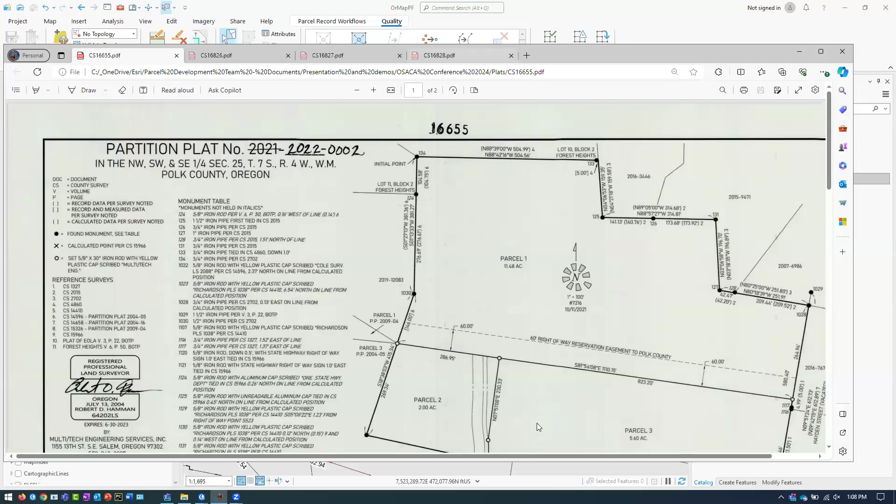All right, so I've provided this data. Christy here, and you provided the data. And this is actually data from Polk County, right, a small subset of data. I was also provided some plat maps that show that this parcel, this big parcel here, according to this plat map 2022-0002, is being subdivided into 3 separate parcels.

Now it's hidden. And each one of these, like this section here, parcel 3, is then subdivided into these 2 parcels, and then this parcel up at the top is being subdivided into these 2, and the parcel on the bottom left is also being subdivided as well. So we're going to go through the actual record-driven workflow of bringing in this parcel, subdividing it, and doing record-driven workflows for each one of these different transactions. I'm going to explain what's going on even behind the scenes, like what the software is doing to the existing parcels and what's happening with lines and polygons.

So to start things off, since this is a record-driven workflow, we're going to start by creating a new record. In ArcGIS Pro with the parcel fabric in map, we have this thing on the top left called the parcel heads-up display, or parcels HUD. This is where you can create new records, manage existing records, and there's a bunch of other tools on here as well. All these tools can also be found on the parcel record workflows ribbon, where you can create a new record up there as well, but I like to use this because it's really handy—it doesn't matter what tab I'm on the ribbon. So I'm going to go ahead and click that, and say create record.

This is going to be the legal record, meaning that everything I create or modify will be associated to this record. So any new parcels I create, any new lines I create, they're going to be associated to this record. If I retire existing parcels, those parcels will then be retired by this record. So in this case, I'm going to name this record. I don't know if this is how you guys name your records, but I'm just going to call this—I see that they call them like partition plats—2022-0002.

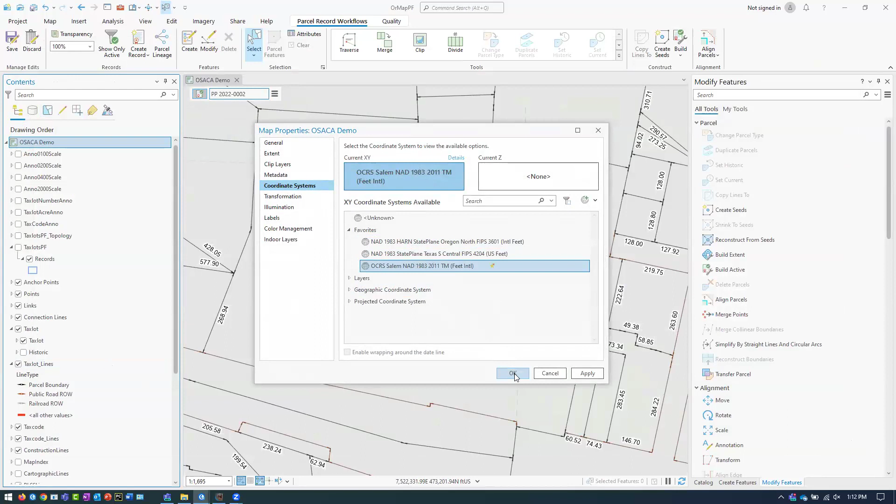So now I'm going to be projecting the data in the Salem NAD 1983 projection. I'll click OK, and now the data is being projected in what the basis of bearing is being utilized in the plat map.

Now I want to bring in, I want to traverse this boundary of this parcel to bring this parcel into this area. So I'm going to go and click on the traverse tool, and I want to set a start point.

I'm going to be creating tax lot lines, and where I'm going to be starting, according to the plat, this is the initial point here on the top left. That's where I'm going to be starting.

Now, also in the interest of time, I'm not going to sit here and COGO this entire parcel in, because we're going to show COGO in here in a minute as well. I actually have a traverse file, which I can import, that provides all the COGO information for that.

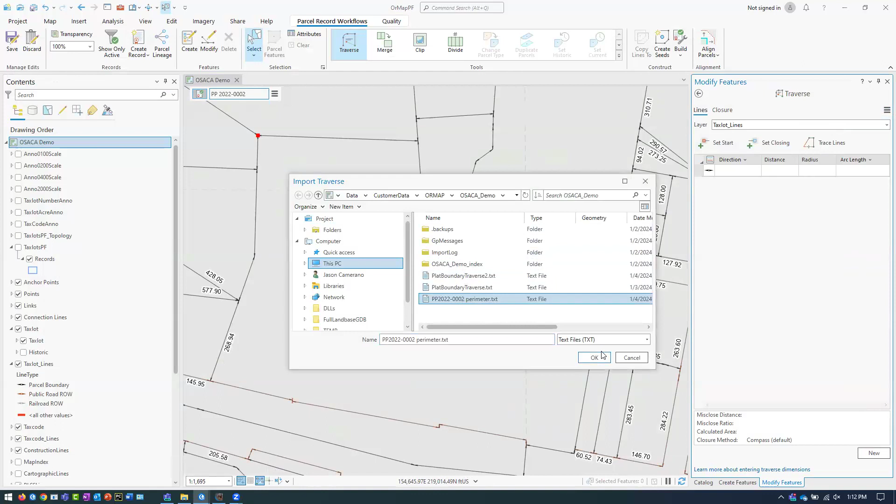So you can see as I brought it in, the lines have all been created. I can see here in the grid that all the lines—I could QA this with the actual plat map to make sure everything matches up. This closed distance of 0.02 feet, so this is a very highly accurate traverse. It closes well, and at this point I'm ready to just bring this in.

But first, actually, the other thing about this plat is what I want to do—I actually want to split this here too, because while I'm in this projection I'm currently in, I need to also subdivide this parcel into these smaller subsections.

So what I'm going to do is go up here to the parcel record workflows ribbon, and click show only active. What this is going to do is filter out all the other layers and only show lines or features, polygons or lines, that are associated to my active record. So in this case, all these lines I created are associated to my active record—that's all I'm seeing. This is just putting a quick def query on all of my layers.

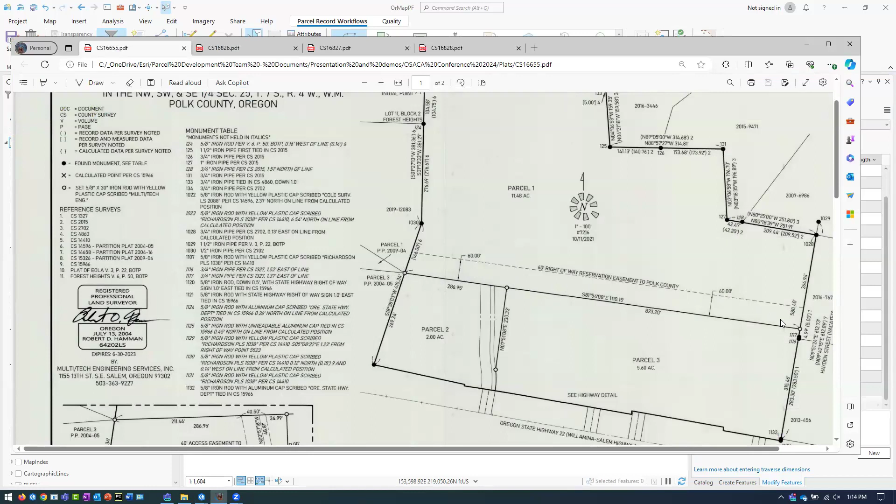So what I want to do is start a new traverse and split this parcel based on this plat. Over here on this point is where I'm going to start, and I'm going to draw a line from this point to here, and another line from this point to here. This point, if it's created over here, I believe it's right there, 264, yep.

All right, I'm going to click new traverse, and set my start point to this location where it was split. I want to set my closing location, because in this case I'm not creating a full loop traverse - I'm starting at a point and ending at a point. So I'm going to set my closing location to this location on the right. Now I'm going to start entering my traverse.

The first line, actually I have the plats here, so I have to keep flipping back and forth. All right, so the first line is going to be going at 81 degrees, 54 minutes, and 8 seconds to the southeast. Now, since this is using quadrant bearing, I can simply put 2 to represent southeast - 1 is northeast, 2 is southeast, 3 is southwest, 4 is northwest - and hit enter.

Now it's asking for my distance value. I'm going to go 286.95 and hit enter. I'll accept the bearing again, because it's the same bearing for the next course, and enter this distance of... oops, nope, that's the full length of the line. It would be 823.20 feet.

And there we go. We can see that the line now closes on that close point. When that line was created, the end of that line fell within a 1 foot tolerance of that closing point. Therefore, that line is now snapped to that closing point, and a misclose error basically has been applied to those features. This allows for the geometries to change basically to fit and connect to those points, like the starting point and the end point of the traverse.

58.89. I'm going to hit enter. Now I notice my curve is actually going in the wrong direction. If I switch back to the plat, you'll see it's going counterclockwise, not clockwise. That's just a mistake here.

I can just change the direction of the radius to minus 211 feet, and that's going to change the direction of the curve. Now you can see it's going in a counterclockwise direction.

Now that I've fixed that, I can enter in my last line feature here at 7 degrees, 51 minutes, 8 seconds to the northeast, and this is going to be 230.33 feet.

Once again, we've closed within 0.01 feet of the closing point, so we can see that the measurements are highly accurate, and I can accept these results.

So there we go, we've got our 3 parcels. We've traversed them in. Now, actually, we've just traversed the lines, we don't have our parcels yet. So our next step is to actually create the parcels that fill in these completed loops of lines.

The next step in the parcel fabric record workflow is to create seeds. This is going to create parcel seeds within each of these closed loops. These parcel seeds are technically actual parcel polygons, they're just in the small seed shape right now. We call them seeds just because they look like little dots.

At this point, we can build the parcels, which will allow those seeds to then grow out to the area of that closed loop. And now we have our parcels.

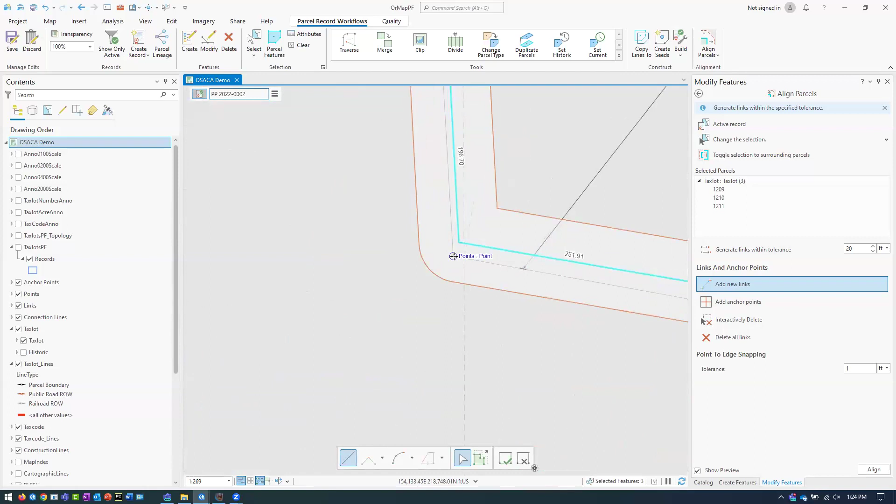I'm going to create links between the geometry I created and the existing geometry below. Now, I could click generate links, but since this data is pretty far off, with a buffer of like 20 feet, I don't always trust generating links with that big of a distance. So I'd rather go in and manually create these links, because sometimes it has trouble figuring out which vertex or turning point is associated to which turning point when automatically generating links.

If this was a lot closer, I'd be more comfortable clicking generate links and then investigating each one. So here's an example: at this point, it's going to be associated here, and this one is going to be associated with this location. Does direction matter?

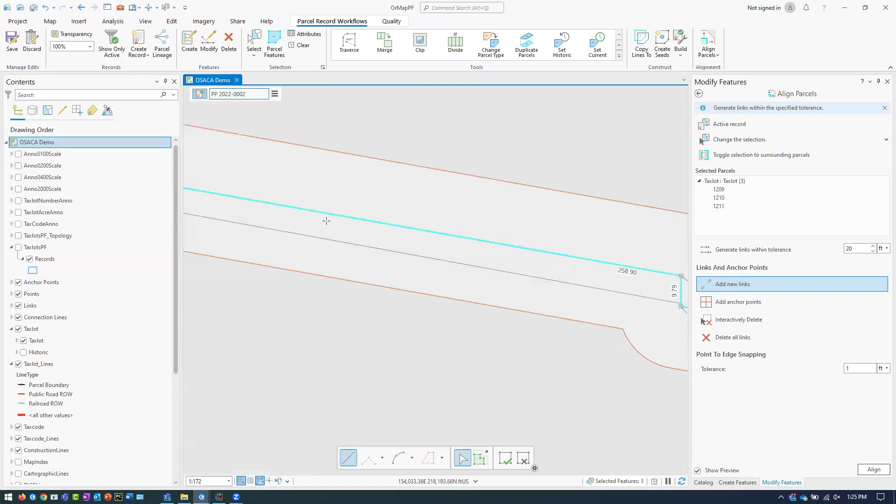On this, no. I'll explain how the alignment actually happens. Whatever is selected is what's going to move. In this case, my incoming geometry, the one I created, is currently selected, and I don't want that to move. So I'm going to push a button in a moment that changes the selection.

Let's go over here to this corner and click there. I noticed when I did this the first time, this was another one that definitely needed a link. So I think those... oh, no, there's one more link here.

So two things: with aligning parcels, the selection is what moves. In this case, I want everything else selected, so I'm going to click this button, toggle selection to surrounding parcels. Just like that, all the parcels surrounding my incoming geometry are now selected, so those are the parcels that are going to move.

The other thing I need to do is change my point to edge snapping tolerance from 1 foot to 2 feet, because I noticed when I aligned this the first time, the existing geometry here is a straight line, but my new geometry has curves. So when it aligned and everything snapped together, there was more of a 1 foot distance between those curves and that straight line, so it didn't seam it up properly. But changing this to 2 feet, it was within tolerance, and it seamed it up pretty nicely.

So with that, I'm going to go ahead and click align. It'll do the processing. And as for the question about whether the direction of the links matters—they do not, because it's based on the selection of the features, which determines the direction things are going to move. So there we go, we can investigate some of these corners and see that everything has now aligned.

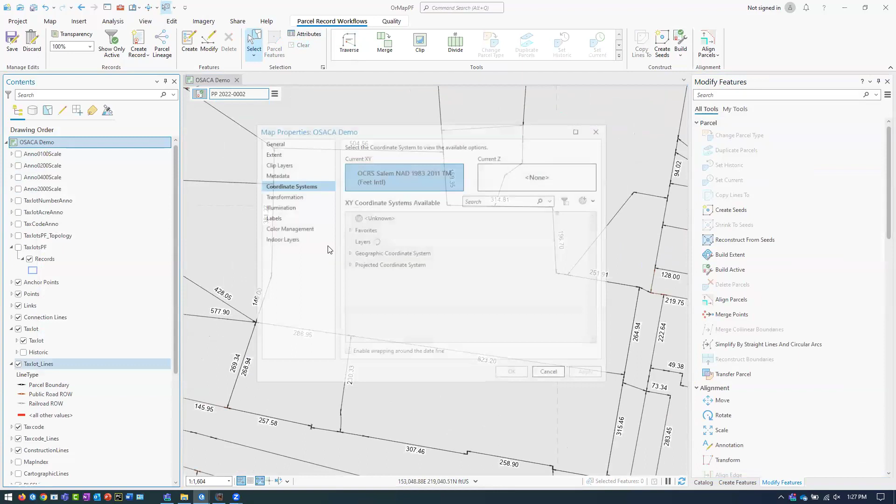All right, so I'm going to back out of the alignment, and show you what it looked like if I imported that traverse without the proper map projection. I'm going to go back to the map and switch back to the State Plane Oregon projection. I'll click OK, go back to traverse, set my start location to that point up here, and import the ArcMap traverse, choosing the same one.

And you can see it's quite a bit off, much more. I've already adjusted the data a little bit to fit, which was already slightly off, but this would have been even more off. So the movement I already did, plus this, is how much this would have moved.

It was pretty significant. When I first saw it, I was like, there has to be a basis of bearing something on this document. That's when I went and started searching for it, because some of those areas were like 10, 12 feet off. It was pretty significant.

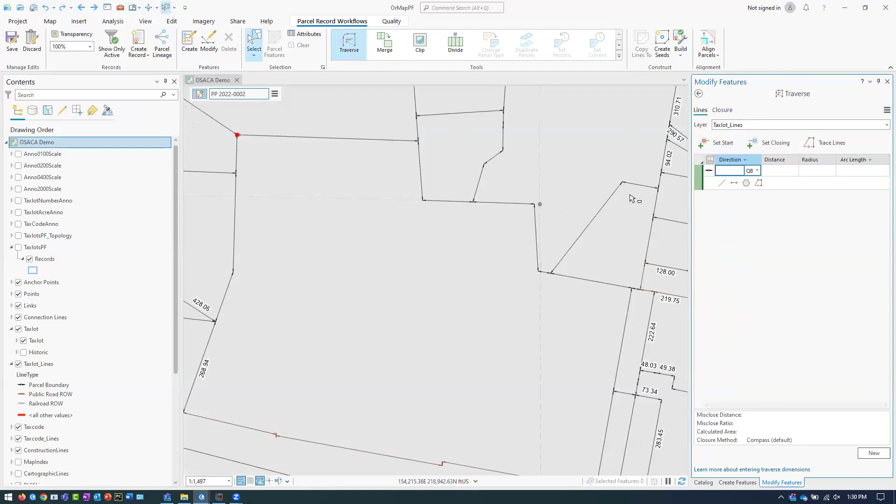As far as using the aligned parcel tool, there's some people that like it and some that don't. I know too, the way that we illustrate is we really haven't done anything with conversion or with the coordinate system, but instead we do ground to grid. And we match the line up first, and that way the first line typically aligns with everything else. That's kind of what you're talking about with rotating. You may rotate it, set the basis bearing up, or you may rotate when you're done.

So adjusting the outside in when you know your map's not as great, or doing it the other way, is this something... it's too bad Donna's not here, who retired last year, because she would be going, does this look okay? Well, I might have a concern, like, so you want the road to remain, and as I see it, the road's gonna adjust itself to align with the new import.

But you might really trust that road, and you want that road to stay the same. I just see a slight issue of everything around being adjusted to fit this new import. So what do you do in that particular case? And again, you keep going, get your thing in - I can talk while doing this too.

So what you do in that particular case, I would recommend - things are going to, especially if you start having survey grade control networks in your data, those are going to be the real true representations of where things are supposed to be and what things are supposed to be tied to. So yeah, if the road moves slightly, if you run things like least squares adjustments, the things will adjust to where they should properly be based on the control points and the COGO measurements that have been inputted onto the lines.

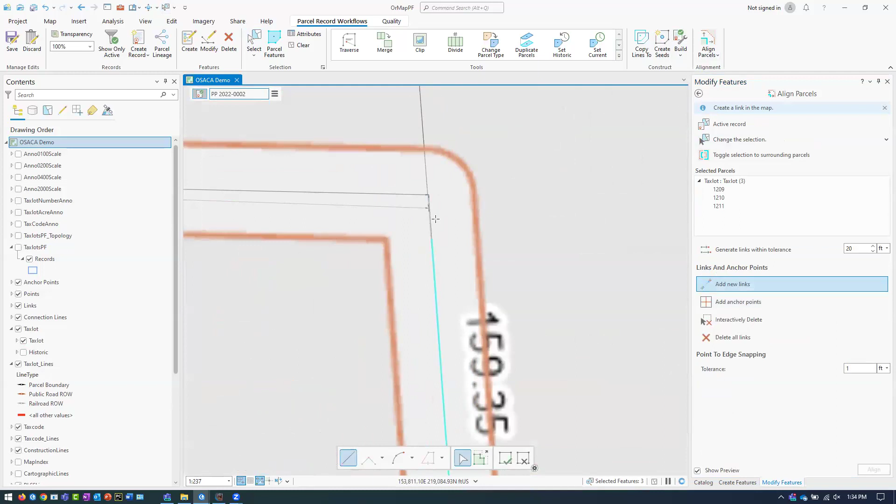So as you're adding those links, can I temporarily add control points? Let's say I like my road -- it's not the greatest road, but for this I want it to hold. Can I add those control points, say they're fixed, do the adjustment when I'm done, and then delete my points?

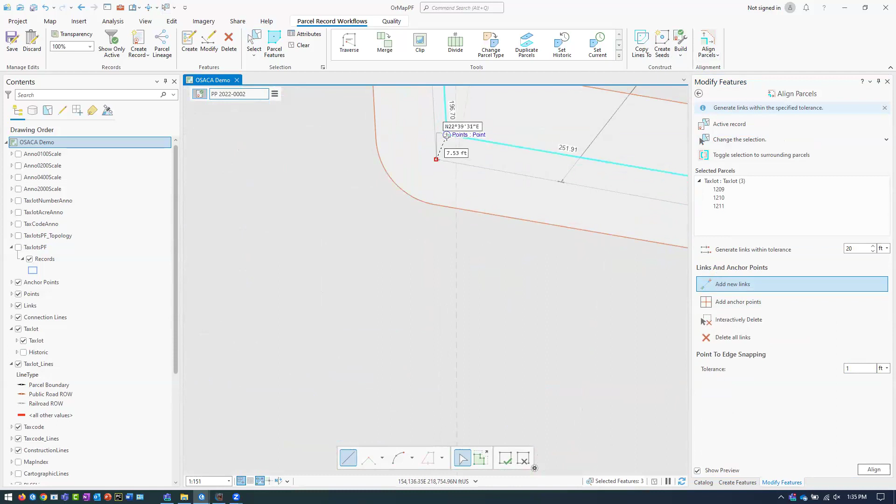So like roads outside of this adjustment, but your south line there -- along the south line, could I add some and effectively hold it? You could, but if you added those beforehand, those won't move. So you could put control points down there. Okay.

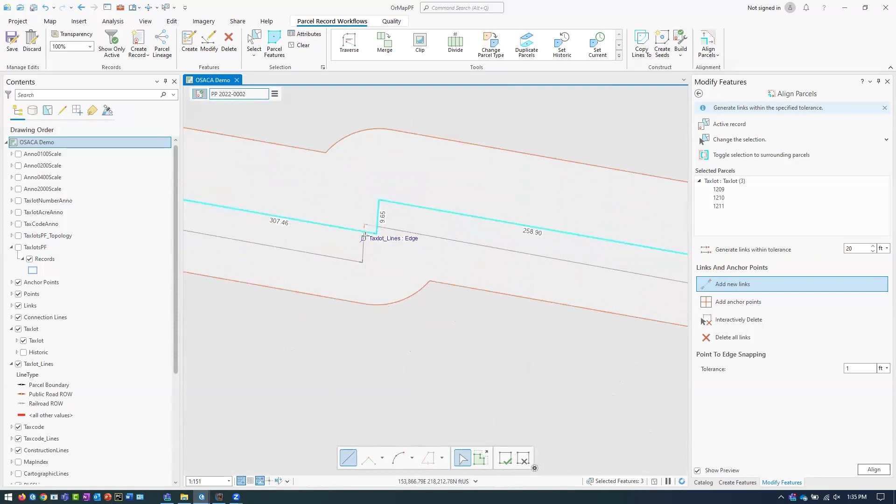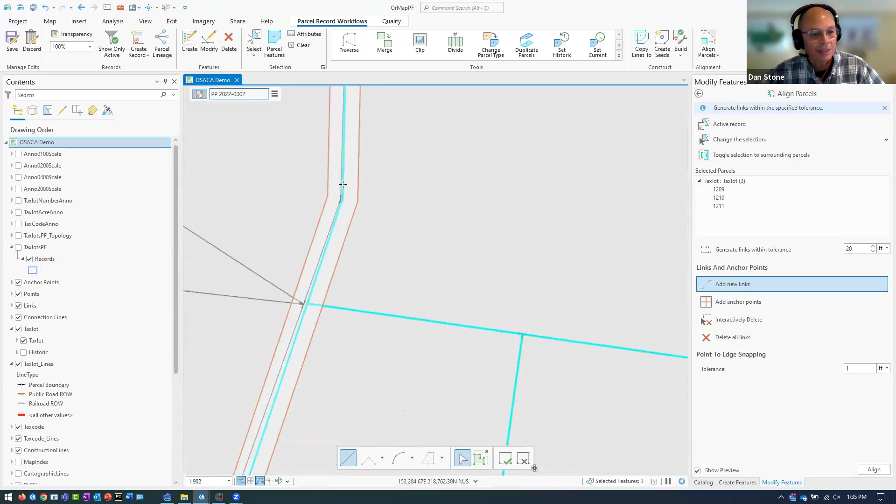Dan. Yes, I'm here, Jason. There you are, been watching. Dan, I thought you may have stepped away. When I was introducing myself I called on you to also introduce yourself, but you can go ahead and do that right now. I think a lot of the folks know me. I'll turn on my camera if you guys can see me. Dan Stone -- I was out there probably right around 2019, 2020 in Bend. I met some of you guys. Some of you couldn't make it over the mountain, but sorry I couldn't be there today in person. But Jason, I'm glad you got to go up there.

So the next one I'm going to do is plat 2023-0015, which is not that one, this one here. This is another partition plat, and it's going to be partitioning parcel 3 on the bottom right. It's going to create a small parcel here, and then a split line from the top to the bottom here. So for this one, let me just get the map out here that I have.

So you're processing all this sort of as a multi-packet record. You've not committed this, you've not saved this, and so the underlying retired by record is there, whatever. You're just processing all of these in one sequence.

I am processing them all in one sequence. That is one way to do it. I'm actually going to process it in different sequences right now because I'm going to be creating a new record for each one. So in theory, this parcel that existed here to begin with, we can see we still have that full parcel, and then we have the small partition one. This full parcel, if it's ready to be retired now, meaning that these new parcels are the new current ones...

With this current record active, which is PP 2022-0002, I can simply click set historic. And now it has retired that parcel.

So I can go down, I can find the tax lines, and there's a layer here called historic, and you can see that parcel has now been retired. So if I click here with the history turned off, you see I only have one feature. There's no more selection chip allowing me to toggle between. So at this point, we can say we've retired that existing parcel, and these are the new legal parcels.

And then that was done according to this one back in 2022. Now these new ones, let's say a year down the line, these need to be partitioned again. So we're going to go to this parcel here. This is a new record.

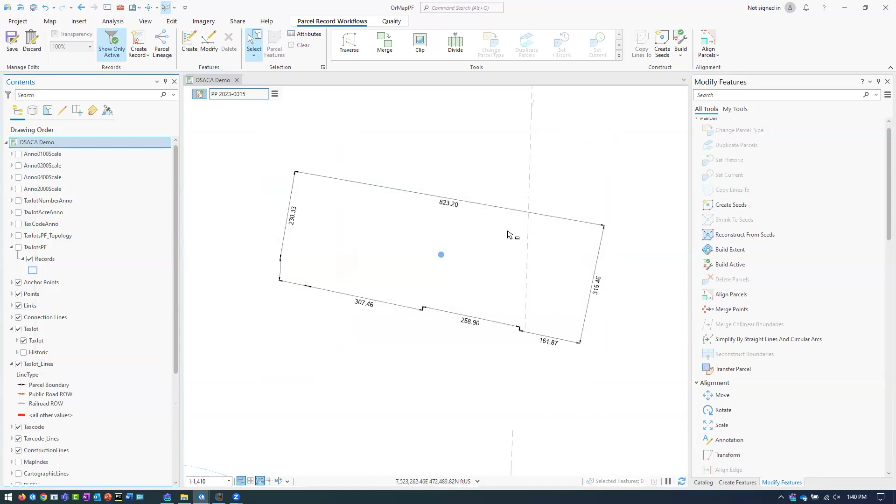Now, I'm back in — if you recall, I switched my map projection back to State Plane, Oregon. So now I want to actually set the basis of bearing manually, so all my lines will then take that into account. So what I want to do is go to the edit tab, not the quality tab, and choose ground to grid.

And I want to choose enter the ground line and then draw the grid line. So my ground line is actually still set from the last time I used it — it's this line here at the top. So the measurement information, the direction of that line is 815408 to the southeast at 823.2 feet. So this is my ground direction and distance.

Next, I'm going to click next, and now it's going to want me to enter the grid line. So I'm just going to use that same line, click here, and then click the endpoint. Now you can see if I go down here, my ground to grid corrections have been applied. So this is my offset and my distance factor. You can also see it up here as well.

So now when I'm entering lines, I don't have to change the projection of the map, but all the data I'm going to be entering, this ground to grid correction is going to be applied.

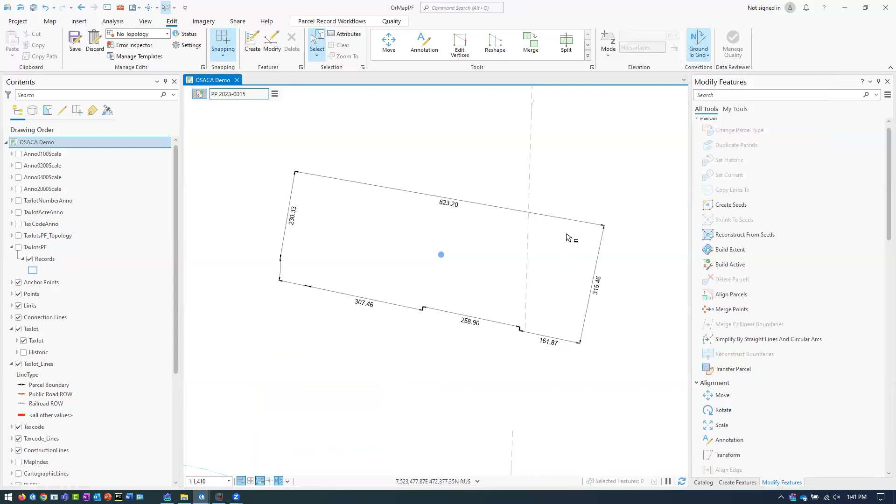So let's go ahead and flip back. I need to create this line here. To do so, I'm going to take this line on the top and divide it. So go back to the parcel record workflows tab, and I'm going to click divide.

I'm going to use the divide tool to divide this line from the end of the line. I want to go back 139.17 feet, and you can see based on the preview where the split is going to be. I'll click divide, so now we've created two lines.

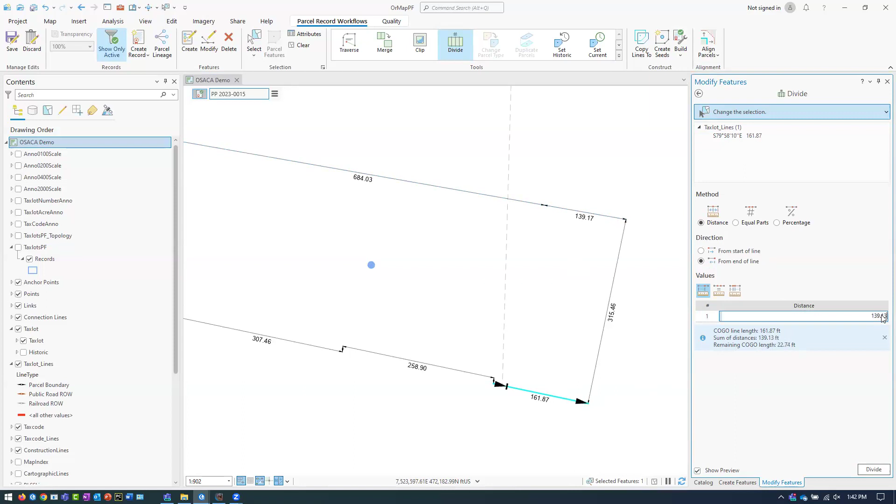I'm going to divide this line at the bottom in the same direction, from the end of the line, which is over here. I want to go back 139.13 feet, and I'll click divide there. So now we've divided the lines.

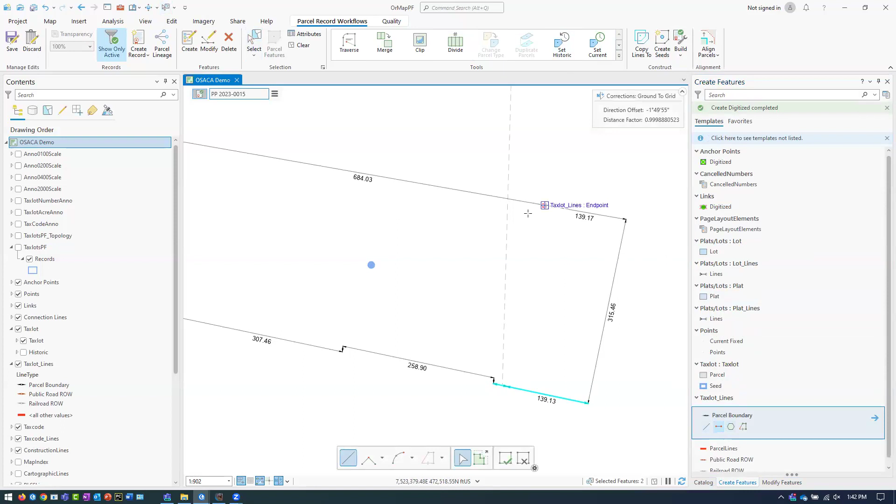I'm going to go back in and actually create the line like you stated, just clicking the line through. So I could go to create features, tax lot lines, this one here. I'm going to do a 2-point line, click this line on the top, and click at the bottom.

Then I'm going to go to attributes, and in here I can enter in that information. I can say this was 09-51-24 in the southwest, which is 3. So I put that there, and then it was a distance of 310.75. That's just another way I could have entered the line, as you explained earlier.

All right, so that parcel has now been split, and I want to do some more division on these lines. I want to divide this line. I'll click divide, and in this case I'm going from the start of the line, so from down here I want to go up 85.43 feet.

Divide it, and I'm going to divide this line from the end. I'll switch back to the end of the line, and go 147.75 feet. I'll hit enter there, and then click divide.

Now we're going to go back to the traverse so we can have that extra redundancy of knowing where the lines and features start and end, and whether there's a good misclose. So I'm going to start at this point and close at this point, and enter in these measurements. I'll show you some other tricks for entering traverses. Let me enter in this first one.

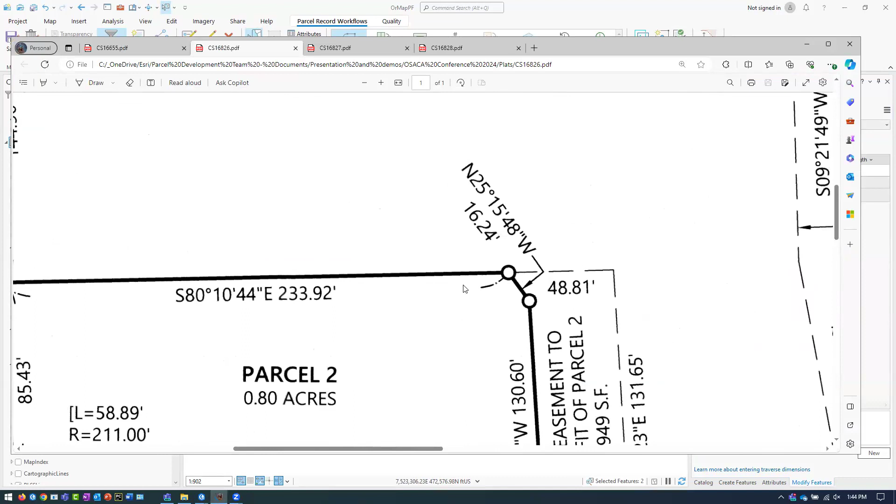It's going to the southeast at a distance of 233.92. I'm going to hit enter. For the next measurement, if we switch over to the plat and zoom in, we can see that this first one was southeast. This next one, the way I'm going clockwise, this direction says northwest. So if I'm just entering it in as I see it, the actual line is not going to go the way that I want it to go.

So I'm going to go 25-15-48, and this is going to the northwest. I'll hit enter on that, and say 16.24 feet. And we see that's going the wrong way—the geometry is going in the wrong way.

Instead of me going in and changing those around, there's a new command where you can select the line, right click, and say reverse direction. And you can see the line direction change. So what version is that?

3.1, 3.1 or 3.2, I actually don't know. It's a fairly recent one. We showed it off at the UC this year, and a lot of people liked it a lot. That'll reverse the direction exactly 180 degrees.

There's some other things you could do within the traverse, which is fun. I'll do it on this one. So this one is going to be 7 degrees, 29 minutes, 48 seconds southwest, so that's 3, and the distance is 130.60.

So you can kind of use this distance field as like a calculator. Let's say the measurements were labeled like 50, 50, and 30.6 feet—that's just how it was labeled. But you know it's one straight line segment, and it's supposed to be 130.60.

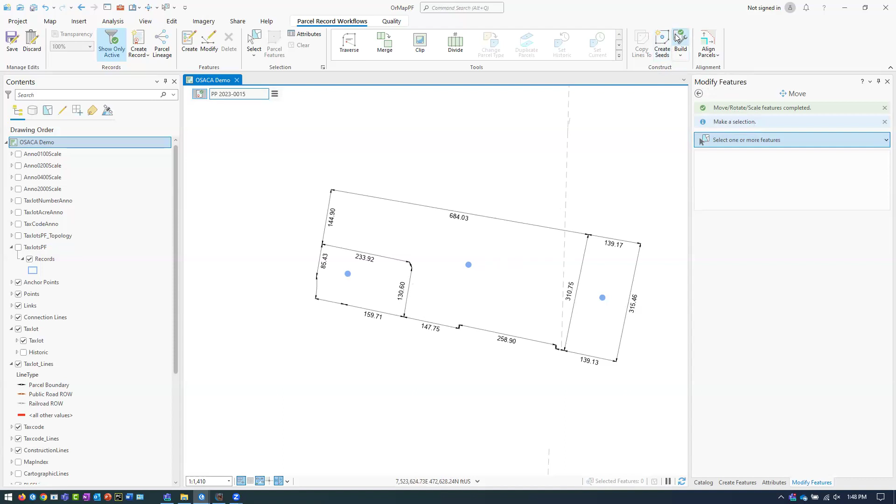Did you have to delete it, couldn't you move it? I could have moved it. Delete was easier because it was just a template seed that wasn't anything. I could have moved the seed, however I wanted to do that, and then I would just click build, and the same thing would happen.

The reverse line, what will it save as the Cogo activity? Will it save the original one you input or the reverse? In this case, it will save the reverse direction input because in the actual numerical value, it's going to be going in that direction. If I needed it to be in that other direction, I would have to go back in and change it, or I wouldn't have been able to do the traverse that way, because the traverse needs to have a full flow.

So if it was really required by the authority to say that line says northwest on it, I would have just actually finished it up, made sure everything's good, and then gone back and changed it.

So what's the difference between doing this, creating the seeds and building them, versus just using the line work to split the parcels? Like just doing a split straight across, selecting the lines and splitting, having the parcel as one parcel and splitting the lines into 3 parcels.

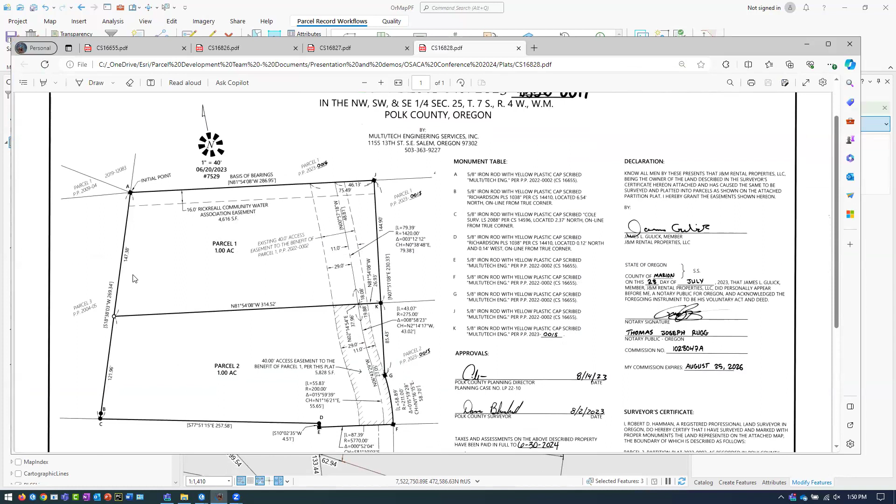I think there are different ways that I could do this. For this parcel here, I can just switch over to this one. I could technically divide this parcel, let's just see how well this works. I could take this parcel - oops, I got the move tool active - let's see how well this works.

We're going off script again.

So we're going to create a record for this one. I'm going to say this is - what is this one? 017. So 2023, 0017 partition plat. Forget to set the date there.

It's fine, so I'm going to click divide. I'm going to divide this parcel by - this is the dividing area - and I want to do equal area, equal width, number of parts: 1 part, and going according to this, it's supposed to be 144 feet, 44.9 feet down. I think that should be right.

Oops, not that one, that's the wrong map. Got it? Oh, thank you.

147 feet... 147.38. So that's about where it's going to go. I'm going to click divide. So that's another way I could have divided. So now I've divided the parcel.

However, doing the division this way, it is actually not splitting the line up on the left side here. This is an enhancement we're actually working on that will allow for that to happen. But the other thing is doing the division of the lines, you get that extra bit of accuracy of dividing the line and splitting the lines up into those two separate pieces. You're able to do the traverse to see the redundancy of how accurate the actual measurements are on the plat.

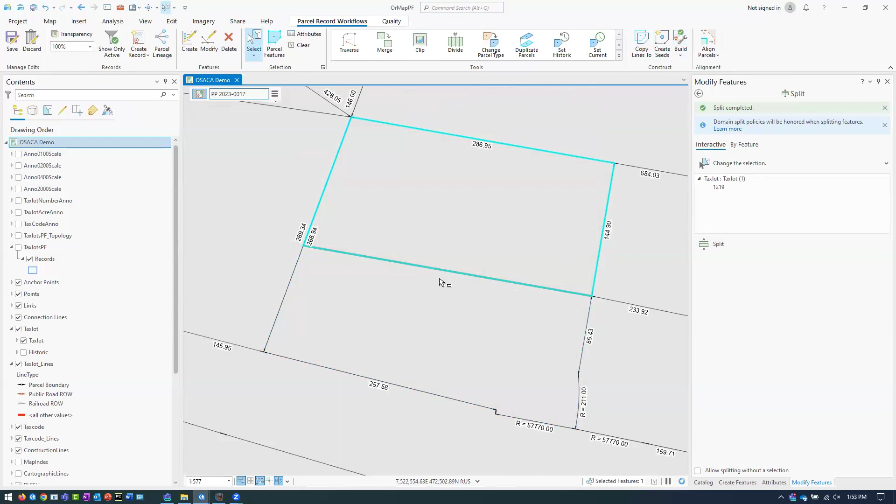There's no line created here yet because we split the parcel. So now what I need to do is I need to click build again to then create a line feature in here. Here my selection.

What do? We created a taxlot line. Oh, I created the wrong line feature that's missing. Line type just is not identified. Oh, line type's not identified. Yeah, that's what it is. Got it. So I could have just done attributes, and it's under line type, public. Something. There we go. There we go.

Now we're good. Then I can go in and attribute that line work as well. What was the question? So build creates the feature that's missing. If you add the lines, you hit build, it creates. Actually, it did create the line. When I did the split, it actually did create the line.

I thought it didn't. I thought I just split the polygon. But since I had an active record, the split tool became parcel aware too. So when I split the parcel, it then created the line on it. But it didn't know which line to create. So it just created a line from that feature class that is associated to that parcel.

And then I had to just apply the line template. So I didn't have a default value set, so it just made it in that one so that it still caught it. I thought for some reason it's a topology error. I was like, what is happening? We like it that way because it double checks us.

There you go, editing. As I say, the redundancy is always a good thing when entering in a lot of this data, like having this redundancy of checks within your data to flag certain errors or certain things that people may have forgotten.

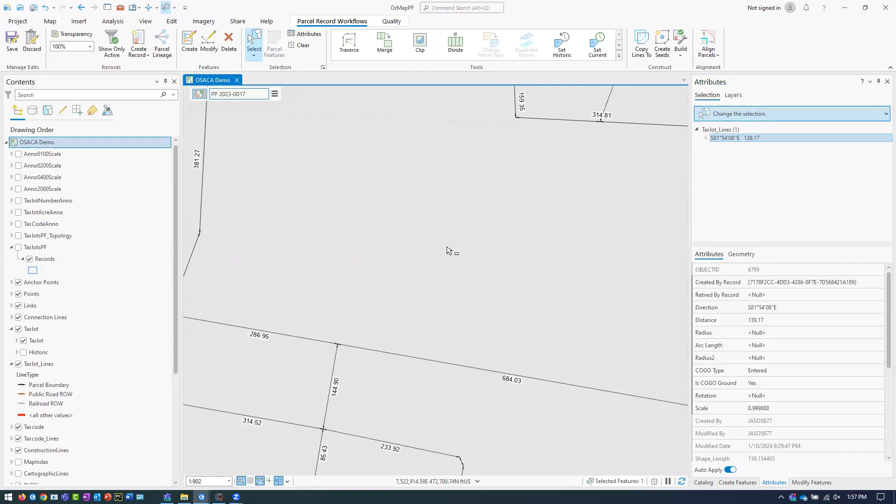It's all good questions. Anybody else have additional questions? How are we doing on time anyway? We said one - it's been about an hour, not quite. Cool.

Questions? Yes, so obviously we have not added map number, tax lot number and all that - that's kind of outside the bounds of this. But at this particular point, have you committed everything to history?

Yeah, we can take a look at the history again. I still haven't done the top split here, but let's look at how all the historical transactions have transpired now. If I go to tax lot and turn on history, I can click here and see we have our historical parcel, which was the original one that existed there. If I click down on this area, you can see I still have the big tax parcel because it's in that area, and then I have this parcel - that one has also been retired. In this area, I have the big one and that small tax parcel.

What's interesting is there's a new feature in Pro 3.2, which is that I can take this new parcel I created and go to the Parcel Record Workflows tab, click the records tab, and say parcel lineage. I want to see the lineage of this record, and I'm going to click create. This will show me a little lineage table of the history of those parcels. It's just kind of a fun thing - it's utilizing existing tools within the software. These are called link charts.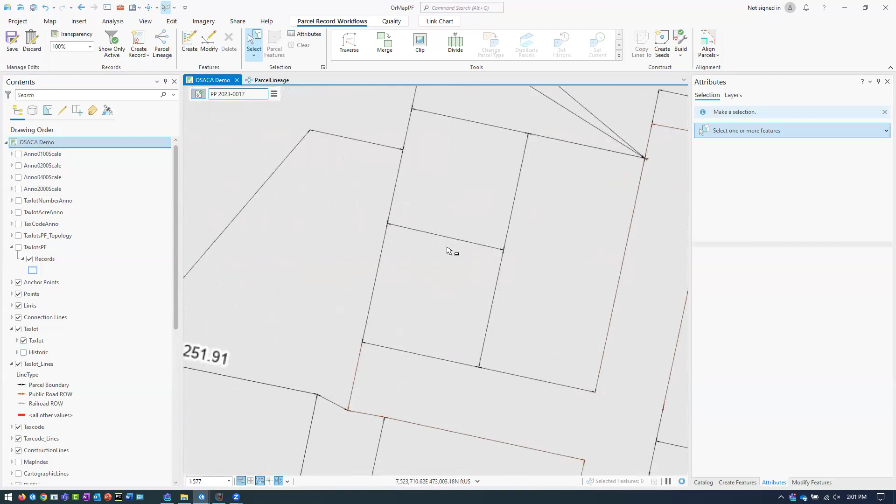Let's go to this area here. I want to merge these two. The owner of this parcel bought this one, so I'm going to merge these two tax parcels into one. So I'm going to create a new record. I'm going to call it M and then some numbers. And we're going to say this is what would this be? A combine.

All right, that's a lot of dots on combine up there, wasn't there? Or there was one dot on combine. One dot. So you're getting your one dot's worth here.

So I'm going to select these two parcels. And since I have an active record, the merge tool is now parcel aware. I don't want to use a template, but I want to keep the original, I want to keep all the address and information of parcel 300 here. I'm going to merge it together.

You can see that line disappeared. Now your question is, why do you care about that line after it's gone? This line was recorded at one point, and it has all that recorded information. So if I turn on history, you can see the lineage is not only maintained on a polygon basis, it's maintained on a line basis.

And I'm not just saying every line of those two parcels is retired. Only that one line was retired, meaning if I look at this parcel and its surrounding lines, the lines along the edge were surveyed back when those two parcels were originally surveyed, however many years ago. No new survey was generated for those lines when I did that merge. Only that line in the middle was retired.

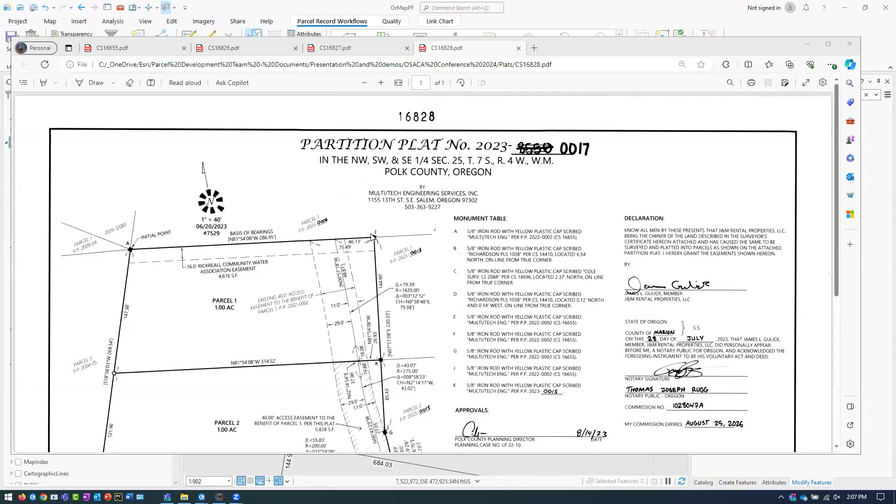And for this one, let's switch over to PDF. For this split, I just need to go from this line to the west and then down to the bottom. I need to divide this line here - and this is the example where this line was retired improperly at that point by the wrong record.

But I'm going to take this parcel and say copy lines. Copies all those lines. I'm going to take this one here and do a division on this - not division, divide. In this case, I'm going to go from the start of the line - actually, I'll go from the end of the line.

613.2 feet. Puts it right there, which I don't think is right. It's probably because I did it out of order. So I need to take 613...

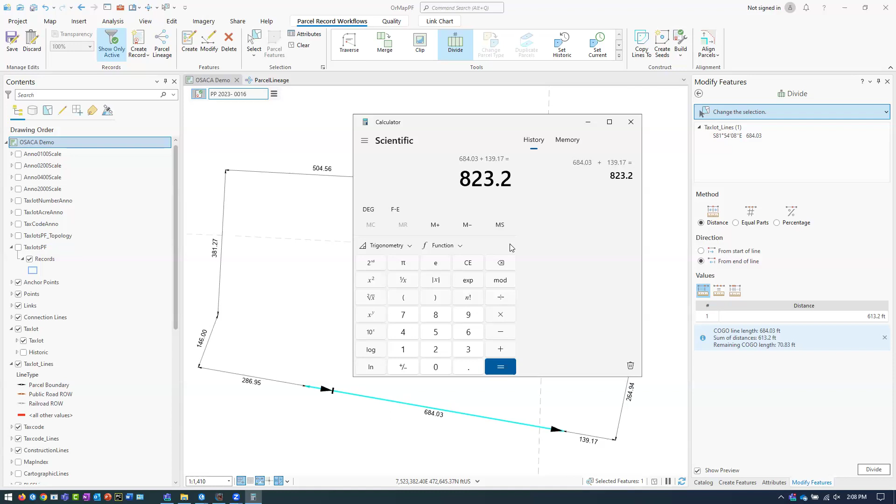Pull up the old calculator here - 684.03 plus 139.17. And then I'm going to do... what am I doing here? I'm thinking of the best way to do this.

It'd be easier to - oh yeah, yeah, you're probably right. So I will go from the start of the line. This goes to show that if I did this in the proper order of the plats, this would not have been a problem. So 210 feet from the start of the line. That seems right - divide, there we go. So 474.

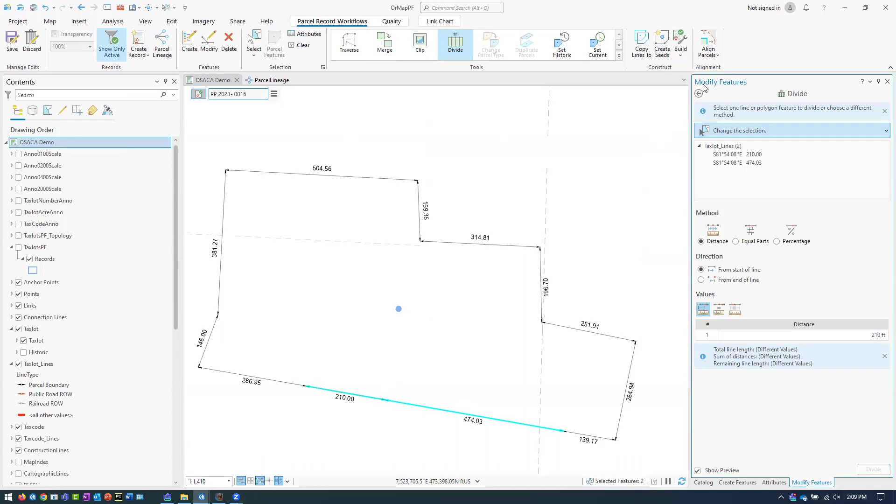All right, so then for this I need to do the traverse. We're going to set our starting point to here, set our closing location to here, and once again we'll just go ahead and enter in the values. I can utilize on-screen constraints to do this as well - I could have done the clicking in the map and entering the data that way, but they won't snap to those points.

Other things you can do here, I'll just show this right now - you could do additions and subtractions in the distance field. In this area, I can actually do additions and subtractions by degrees. So if let's say this was going to be a 90-degree difference, I can say plus 90, and it'll add 90 degrees to that bearing that was currently there. So if I typed in a distance here, you can see it's actually a 90-degree angle on that one. Just other little tips and tricks - where to find all these tips and tricks?

If you go down here to the learn more information about entering in traverse dimensions, click on that link and it brings you to our help page where you can find examples of entering in different traverses.

And if I scroll down, you can see some of the keystrokes, the quadrant bearing shortcuts, closure shortcuts.

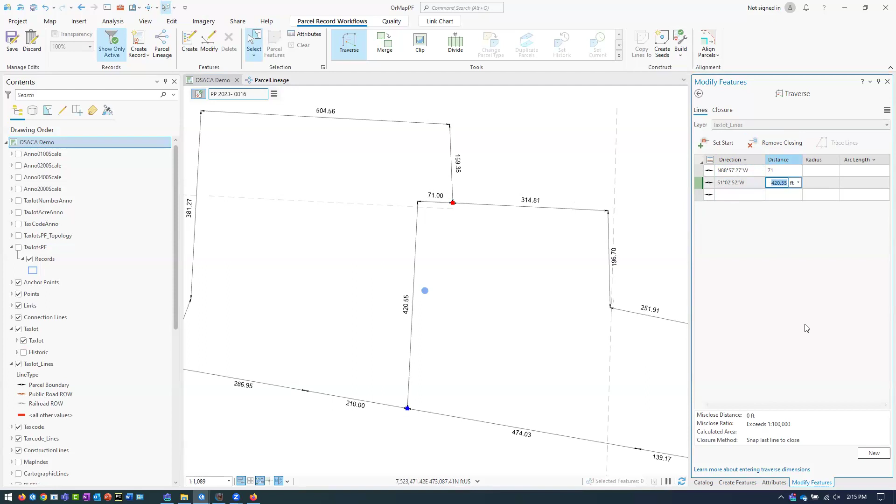Yes, there we go. The traverse tool, you're both entering, but it also comes up, you can use it to modify, same as entering. So I can retrace in a traverse that already exists and modify it, and it will adjust those lines. And in this case, now we have no misclose. So that line has no error on it. So there we go, to retrace that, you took the Traverse tool.

Let's do it. I closed the traverse tool right now. So I just opened the traverse tool and then clicked trace lines.

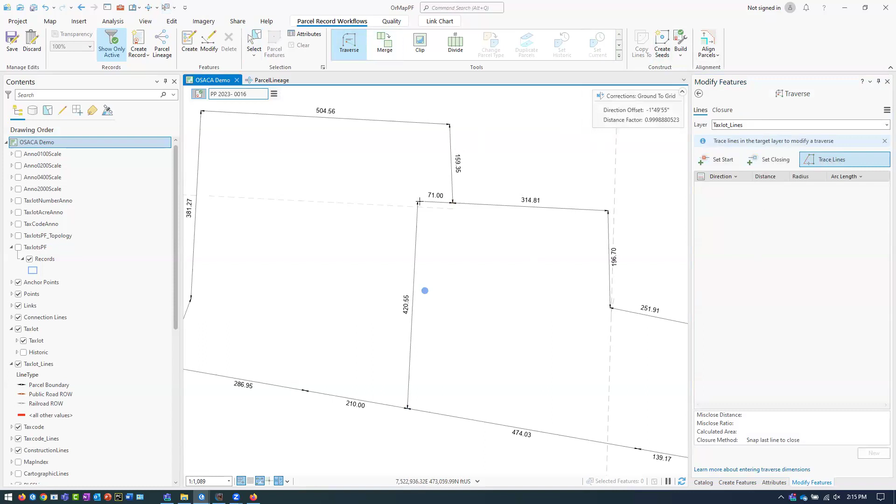Once I'm in there, my cursor changes and I can trace along existing lines. So I just clicked somewhere in the middle of the line, and once I got over here, it knew I wanted that whole line - you can't just get half a line. To get the whole one, I could simply stop clicking here, and it would know I want this whole line going all the way down. So when I click, it brings those two lines into the traverse.

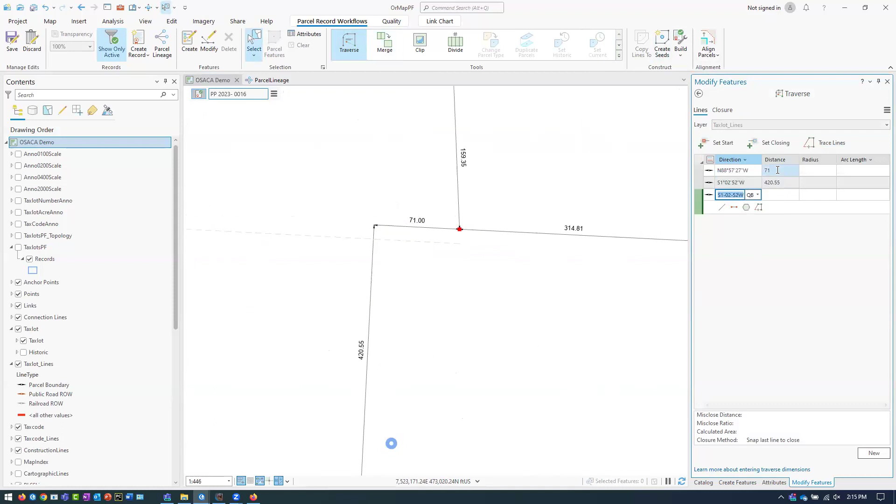And then what I had to do - it knew that my starting point was here. I just wanted to go and set my closing point so it knew where it was ending. And then it showed, and then I edited the lines.

If I had traced and ended at an endpoint, would it have set the endpoint for me, or do I have to set it? No, you have to set it, because the closing point isn't going to be set automatically - it doesn't know prior to that where you were wanting to close. You could have been halfway done with the traverse and decide to get back to it tomorrow, shut down for the day, get back in, trace it back in, and then you just have to reset your closing location.

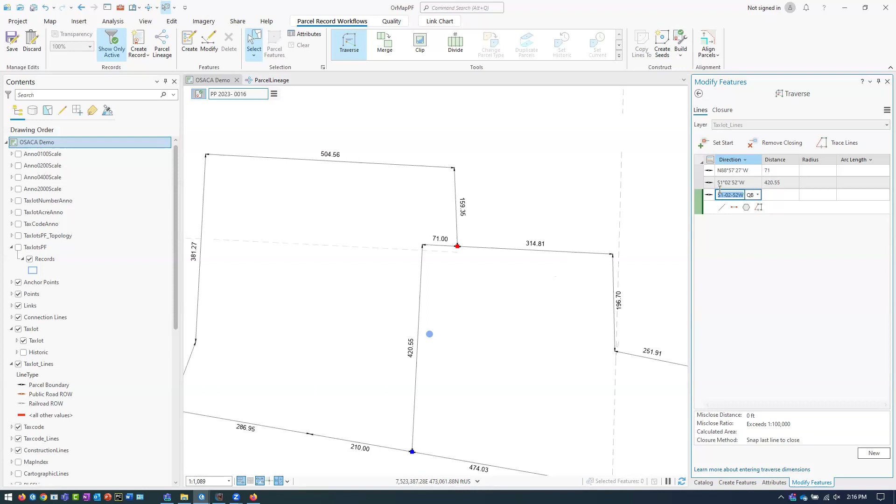So when I have my subdivision and I'm chasing down an error, the trace tool is my tool of choice. Yeah, it's a good one. Very cool. And if the closing location is in the wrong spot, you can always set it in a new spot.

And the other thing is, if you right click on the map, you do have the ability to do absolute XYZ. So if you're doing an open traverse, or even setting your start point, you can type in the actual XY coordinates to place that start point or closing point.

Any more questions? I mean, we've done a lot, we've shown a lot, and a lot of this stuff has been off script - just finding new ways to fix errors and issues with the data, or issues with the way I entered the data.

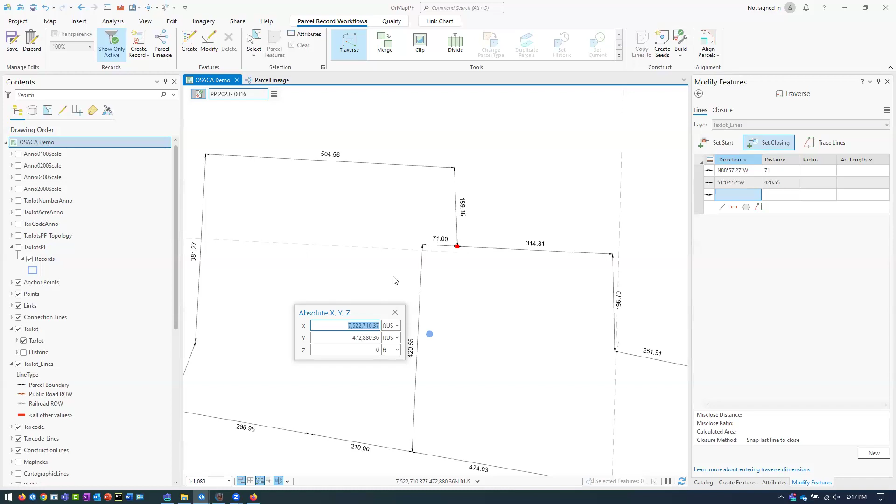Is there functionality within Traverse to enter spiral curves? Yeah, not within the traverse. The only way to enter spiral curves currently is by manually entering the lines - and gosh, spirals are, I always forget how to do these. Let me click on create the line, and there is spiral curve.

There it is. And then you have the parameters on the COGO lines - they do have two radius values in them. So this information will be stored within the line attributes as radius 1 and radius 2 for spirals. That storage is pretty much the same as the ArcMap storage used to be.

If you look at any line - let's go to tax lot lines, data design fields. These are the fields that get added to a line feature class when you COGO enable it: direction, distance, radius, arc length, and radius 2. Having these fields, all as double fields, is what makes it a COGO enabled feature class, and that's how we maintain those values.

And this is something that's come up - you can display how many significant digits by right clicking on numeric, and the same with bearing and distance. You can display the bearing and distance with difference as well. Yes, you can change the numerical formatting here.

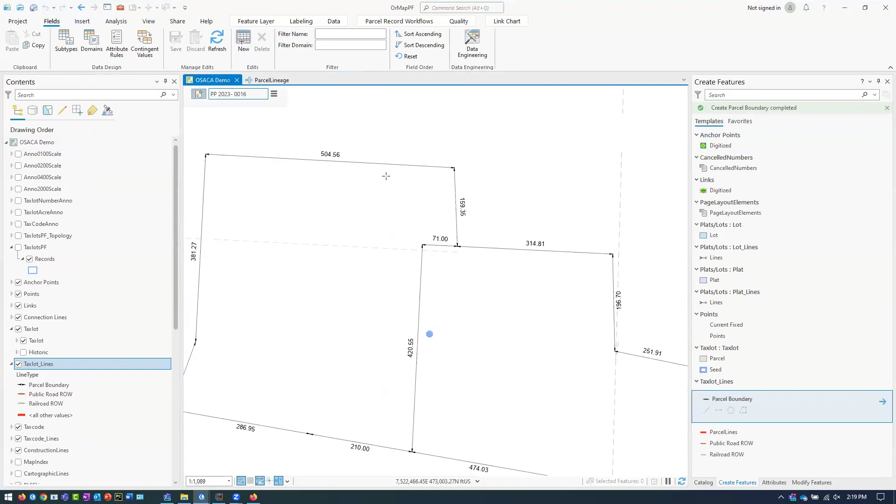So with that, I can click out of this line creation. I can click create seeds and build.

Can't see your points? Yeah, that data is here, it's just how it's being displayed, the symbology. So if you go to the subsection, all other values, you can just symbolize in all other values.

Let me get into this thing again. Go to the top and say corners, right click symbology, and now you can go down to other and give it whatever you'd like. There they are.

When we did this, that's a great point. I'm sorry, that was bad. No pun intended. I'm incapable of doing that kind of thing.

When we set this up, we didn't know how best to symbolize those, so in the sample data set, they're just not symbolized. It's not meaning that they're not important, it just means we didn't know how to symbolize them.

When we've been looking at conversion, which is another side of this, what you'll see here is these are all your control points following the standard symbology we've talked about. When we convert control points, we typically convert them into fixed position points. But what I've found working with different counties is that seldom are the points on your maps actually control points - they're more like guidelines, cartographic placements.

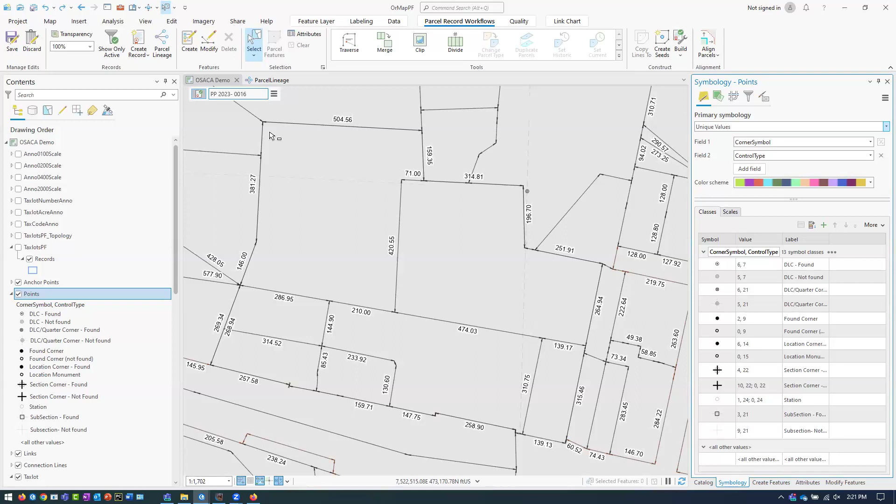So there's been a number of folks where we actually don't move your control points into the points layer, because when you move them into the points layer, they're part of the fabric. So we actually ended up making a corners layer, and corners is where all your cartographically placed corner points that you like to keep go. All your other points are now going to be part of the construction. So we made a clean break there.

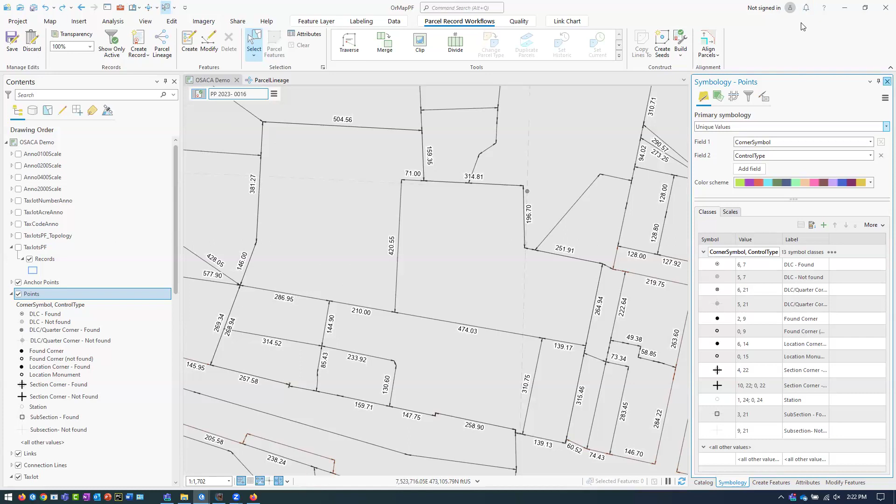So it's just something to consider when you're looking at points. We didn't do anything with those parcel fabric points yet, they're kind of hidden. We took the old cartographic points from ArcMap and brought them over as a non-parcel fabric feature class, and we just keep that up. So we don't know what to do with parcel fabric points yet, and that's come up more than once.

Fine, all those points are there, we don't really see them most of the time, and frankly we don't care. Why do I care about points? I assume, other than least squares adjustments and temporarily using them in the links, why points?

Once again, it really depends on the business too. In many other counties, coordinate based is the primary method of data entry, where all the points is basically how they're starting with their data entry. It's not a bearing distance approach, it's like, I've got this GPS coordinate for this point, and that point needs to be represented by all the corners. And the other reason, technically speaking, to have the points there is mainly for connectivity between parcels and lines and neighboring parcels as well.

So you're moving the point, it's moving the lines and the polygons with it and keeping those things intact. Points we don't stack - points are basically like you can just think of it as a giant pin that's being struck down in there, and that's what's holding everything together.

Even if I have stacked parcels on top of one another, there's still just one point representing each corner. Those are just kind of like the glue of the parcel data. So even though I'm not seeing them, they're the glue. And I think that's a great point.

I like to echo that when we had our conversion, we had a bunch of points that could have been PLSS corner points, but we opted not to include them in the fabric because after talking with the cartographer and a couple different people, it's like, well, this is the point you have in your surveyor data, but we have this one here. And it's all depending upon what point it's been seen and if it was ever updated in GIS data. It started to get really convoluted as to which one really was the most accurate point within GIS data.

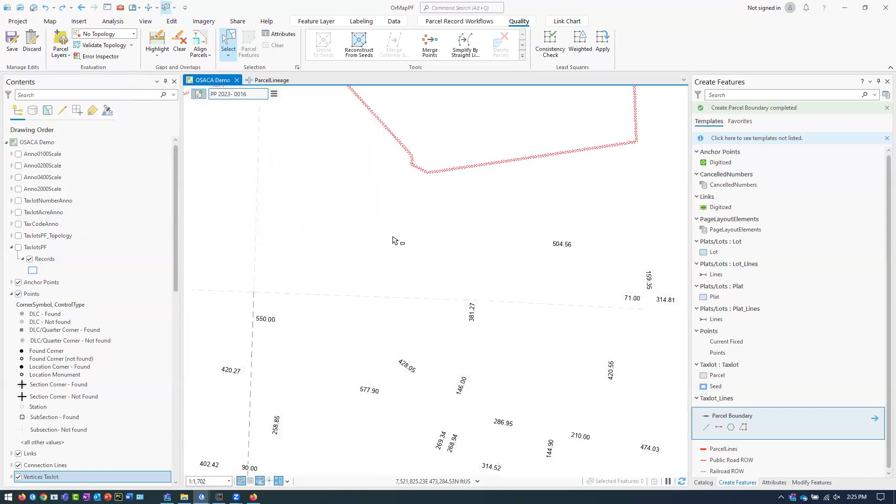Let me check a couple of these. Let me show this tool real quick to see if we have any densified arcs here, which I don't think we do, but we have these parcel layers here, which are things you can add to the map so that maybe you want to see all the vertices of parcels, like see where all the vertices are at. This is just a layer that gets added, and I added on the tax lot layer, and then we can see where all the vertices are on the parcel.

So I was just trying to see if I could find an arc that was densified, and maybe we could do a shrink to seed for a quality update on that one. Let's go.

I clean up all those, or I did for this data. Oh, did okay. It's not always the case, but yeah. Let's just say...

That I entered in this measurement wrong, and I need to fix this data here. Like, let's say it's supposed to be 74 feet. But if I went here and I did... why is this still staying? This zoom stuff is staying on my screen. Like, there it goes, now it's gone.

If I went into Traverse right now and I said my start point was here, and I retraced this, and I set my closing point to be here, and I change this to 72, or let's just make it egregious, I'll make it 75 feet, you can see the lines moved. Let me force the closure. You can see the lines move, but the polygons are still there.

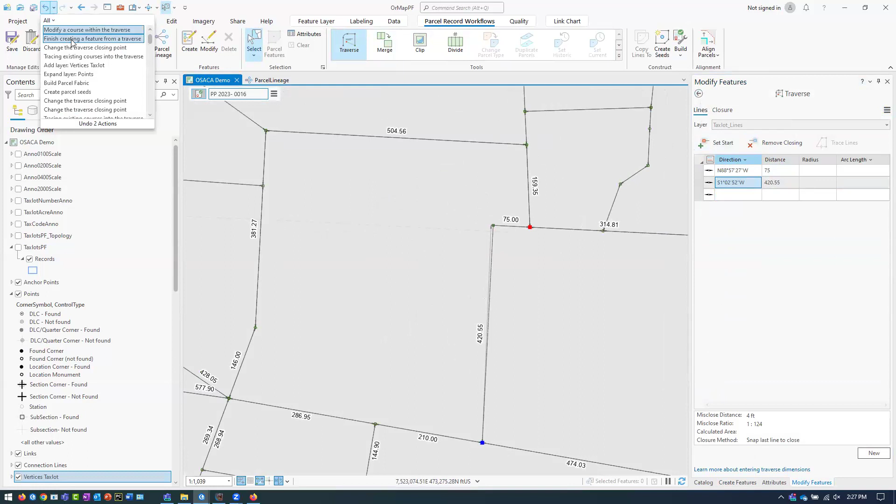So the way that... if I back out of this, let me undo that change. We're back to where we were. What I want to do is make sure that the polygons get adjusted the same way as the lines do.

I can take these two parcels, and since this isn't necessarily a record-driven workflow, I can even do this without a record. I can just go to the quality tab and say shrink to seed. So those shrunk those parcels to seeds right now, and I can go back into the Traverse pane.

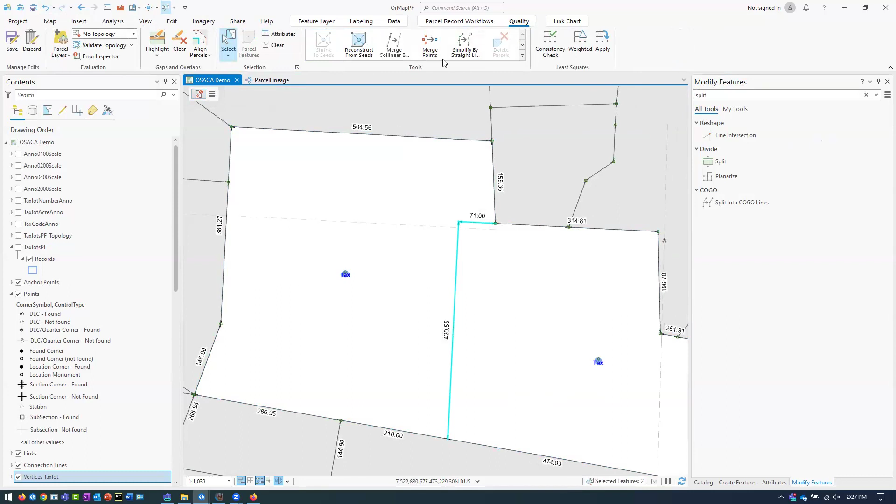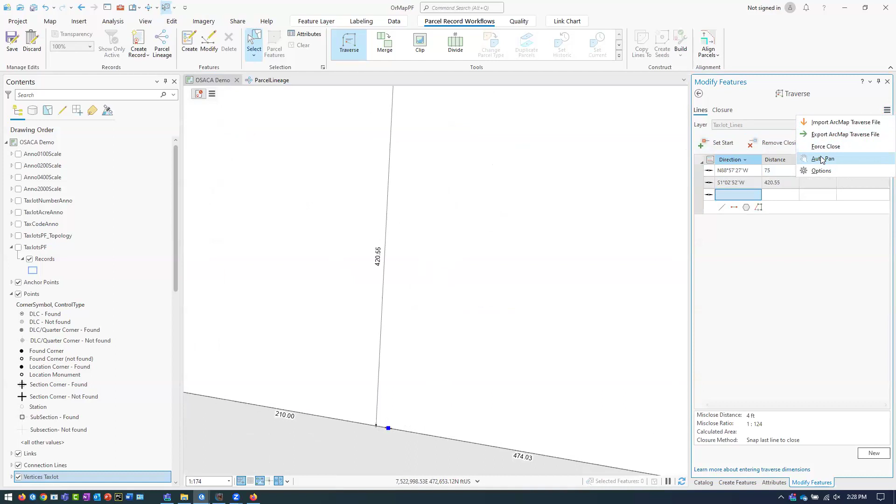And trace this line back in like I just did, change this to 75 feet, which is... let me set that closing point back here at the bottom to here. I know this is going to cause a lot of misclose, but let's just assume, let's say I'd done what I did before and I didn't catch it until later.

And then now I don't even have build active available because I don't have an active record, but I can just say build extent, and that'll actually just build those parcels back to where they were. So this is all done without any active records. Those parcel polygons, the information didn't change, no record information happened.

This shrinking to seeds is usually done for data cleanup purposes. Like, for example, I was looking for densified arcs. A lot of times you go in and you're like, oh, this curve is all just a densified set of lines, but I want it to be a smooth curve. So I would shrink the parcel down to a seed, fix the curve, and rebuild it out, and then the parcel will just fit itself again.

Still part of the same record? Yeah, the record in this case never changes, and this is all data cleanup. A lot of the tools that you'll notice in the ribbon — we have the two tabs, the parcel record workflows tab and the quality tab.

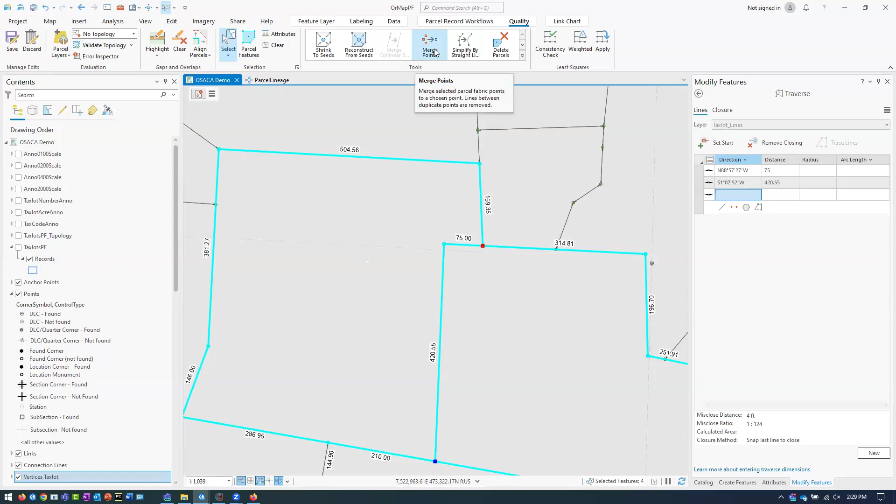Many of the tools in the quality tab are meant for workflows that don't require a record. Like merge points, for example, if I've got a bunch of close points because of maybe bad data entry, a few points that are really close to one another, I could select all those points and merge them into one of them and keep the information of one of those points. That will adjust the data, since all the lines are focusing in on those points. I can also run the simplify by straight lines and circular arcs tool.

That would actually be the way to fix some of those densified arcs, because this tool can run both on lines and polygons. So if I had a densified arc that was truly a densified arc, one single feature with a bunch of straight line vertices, I could run this tool on both the lines and polygons, and it'll smooth both the polygon and lines out the same way.

The only problem is if I brought in a polygon that had a bunch of small segments on the end and clicked build, it would create lines for each one of those segments at those vertices. So this tool wouldn't work in that case. It needs to be one line feature representing the densified arc with a bunch of vertices in there. If it's a bunch of small line segments, this tool won't work.

And then you'd have to go in - Bryce, that's what you and I ran into with Slack - you have to dissolve your lines and figure out how to do that. Did your points move when you did that?

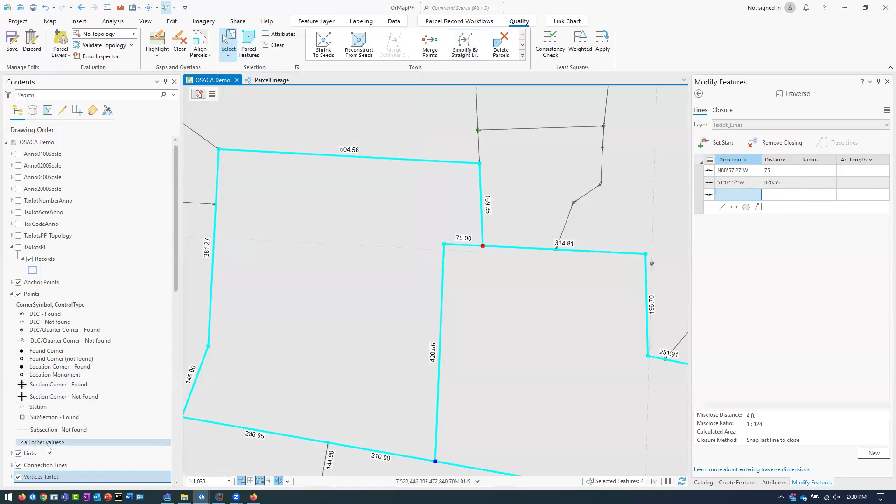The internal point probably moved. We can turn those points back on. Let's take a look - right click, symbology.

And all other values, and we'll do these - oh, look at that, it has two points, interesting. Well, this is definitely a good example of where... so this moved over, because when I click build again, that point wouldn't have gone with it, and a new point would be created.

So are there two lines now? No, there's not two lines - the lines would never... we still just have the one line feature. But in this example, that point would have been an orphan point.

We are creating new tools to find and remove these types of points. So in this case, we'd have to - do we have anything on points here? We don't. We'd need to validate the topology, and if we had a topological rule that all points need to be covered by an endpoint, it would find that and we could delete it.

That would work here. Validate topology - oh, you might have a lot of rules in here that I don't know about. Where is the topology? There it is. We don't apply topology. Oh, you don't.

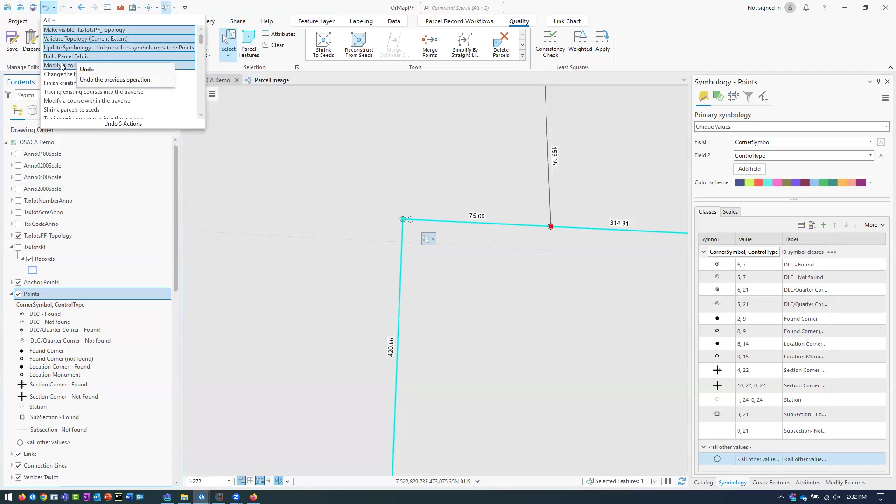So the current topology is the map topology. Based on things we did in ArcMap at Polk County ages ago, my cartographers are afraid of applying topology rules for a lot of reasons, topological creep being the primary one. So we actually run topology rules on a copy of data. It copies your selected features or all the maps to a default dataset, runs topology, and then you can view them and turn them on. We just typically don't apply them in mass. That's why there's not topology in the lists.

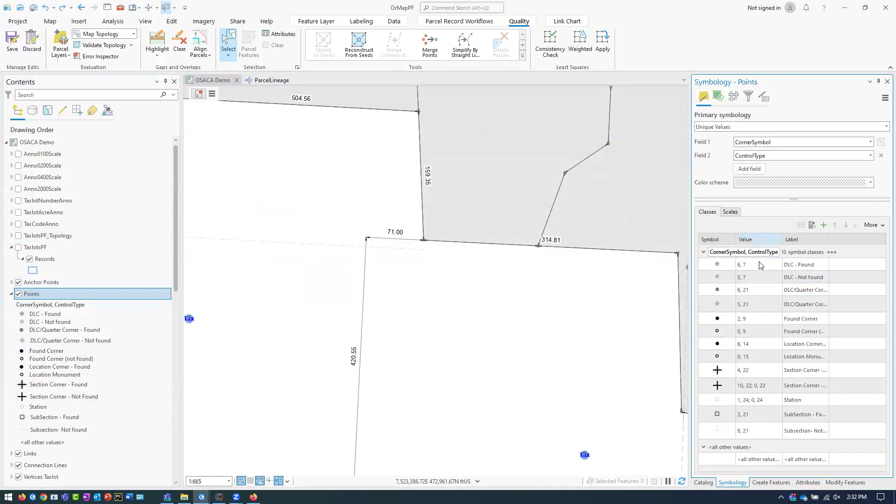Nice, and again that's just been an internal thing that goes back - I'm curious - many years, 10, 15 years. So Phil, you weren't in grade school then, but close.

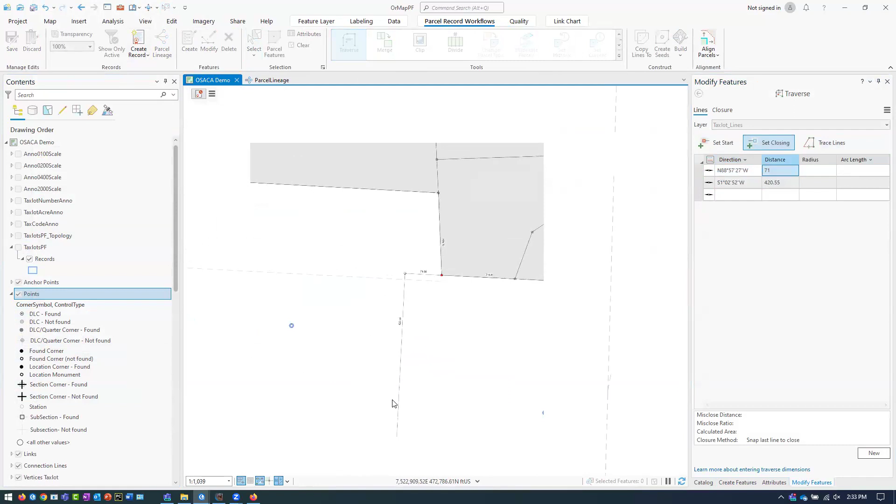No, I am curious though if I noticed topology was off, like the actual trace lines - that my closing point to be that - yeah, it still moved it without bringing the point.

Interesting, yeah, so that would be a thing that creates an orphan point that you'd have to go back and clean up. But that's something I'm going to take a note on, that we shouldn't do.

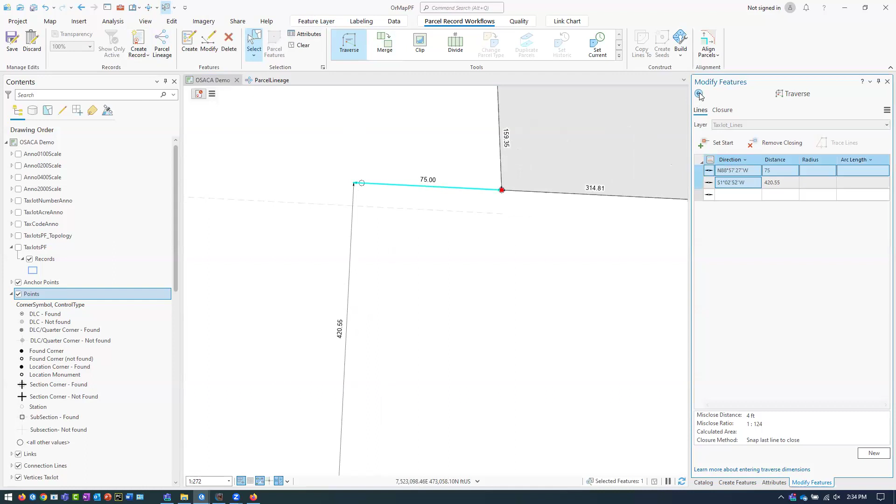I'm just curious, do you foresee any problems working with multi-part features or multi-part polygons? Do we have any issues with it? Yeah, I mean, I just didn't know if there was any.

Well, there was a recommendation before conversion to get rid of your multi-part. So the reason we get rid of it in the conversion is when you're bringing the stuff across, depending on how you build, one of the ways we convert is you take the centroid of all the polygons and use points in poly to generate your tax lots within the fabric. So we explode them all, then make the points and use that in the construction process.

But once you've got them across into the fabric, then it's up to you. Do you want to maintain multi-part polygons, or make them single part polygons and build multi-part as part of your conversion of the data? I think we have them joined, correct? We maintain multi-part polygons in fabric.

Something we should test in Fabric - we ran a tool to do it in ArcMap, but I don't know in fabric. Maybe you want to repeat some of our conversations from this morning on multi-part. Yeah, multi-part parcels are supported within the fabric.

You could have, especially if there's a parcel that's maybe being bifurcated by a road that you then clip into, that parcel is now on either end of the road. That'd be a multi-part parcel - that's the same feature.

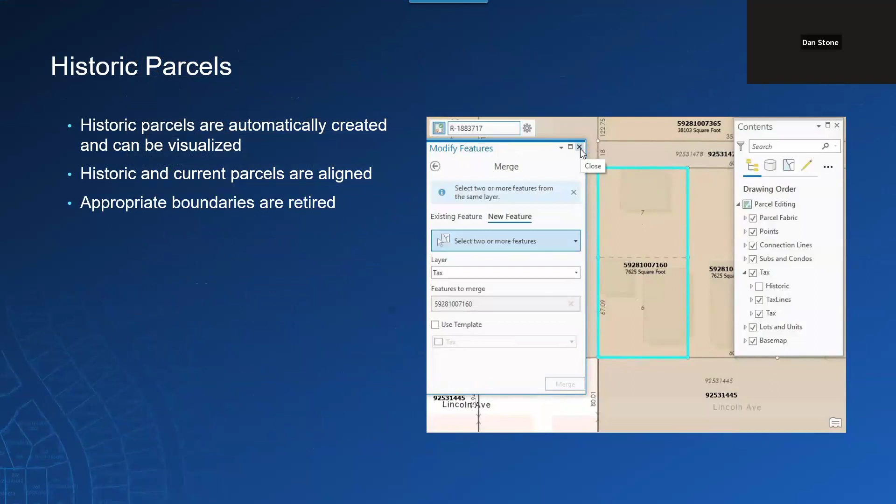Some of the real big benefits, the reason to go here - this is something, like I said, back in '89, '90 when I was cutting my teeth on parcel fabric, the first thing I did when our editors needed to merge 2 parcels was have them select the 2 parcels, then I copied those into a historical coverage. I was doing the exact same thing, except this was all stuff I had to write and implement for my organization rather than it just being part of the data model and out of the box. So historical parcels, I think, were a big thing.

Not only the historical parcels, but the parcel lineage and what we're able to do today with the link charts. 3.2 is the first release where we brought out the link charts. I heard and wrote down a note - Jason, you were doing some edits and they were concerned that the order of the edit affected the lineage of that particular record or those parcels.

I've talked with some other clients who said, I love the link charts, this is great - now give me tools to fix it. So now, we just released it in 3.2. I'm hoping we're going to start seeing requirements where people say, hey, I used the link charts.

I could see the history that's in there, but now I need to kind of reshuffle that history—this one came before that one—so that we can correct it and then maybe have that update the lineage in the back end. So I'm starting to see new requirements coming out of just being able to actually show that, being that it's a system of record.

That is the whole reason that the parcel fabric exists, right? We want to be able to maintain as true to the record as possible, so that when somebody comes in and says the data you have on my property is not correct, we can defend that information and say, no, we can pull up the exact deed and show you exactly what was written in it, and show you that we have the measurements typed into the system and it's drawn exactly the way it was to the deed. So being able to defend that system of record is really important.

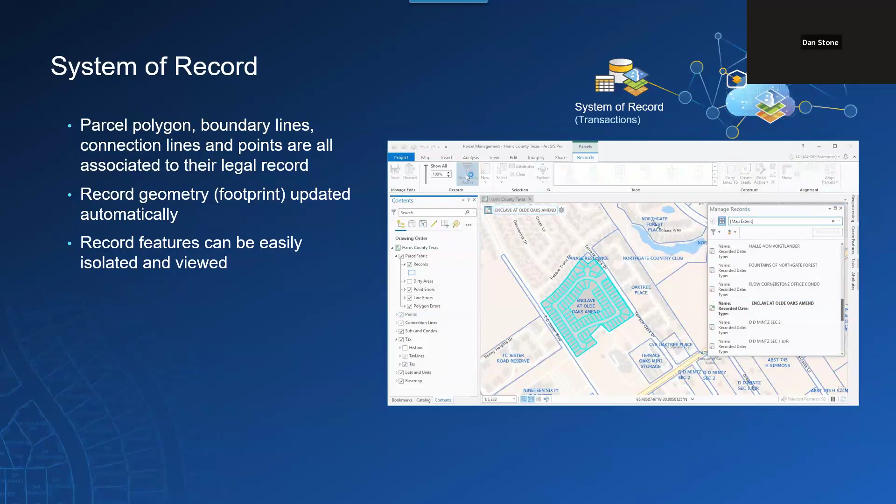And again, part of the reason for the fabric. So Jason showed you a lot of stuff. I'm just going to show you what's coming up with 3.2, which is already released. If you haven't gone there yet—some of us have gone there and come back—we'll talk about it another time. But yeah, there's some really fun stuff in 3.2.

The editing templates—this was something I talked about at the end of year meetup, about possibly storing that in your enterprise as a template for your editors to grab. Here we have some editing templates. One thing we did was, now that they persist in the traverse pane, it also remembers the last layer used. The reason Pro kind of went away and came back is because it also remembers between sessions. So if you set up the layer templates, what you were using in the traverse pane will be remembered even when you shut down Pro and bring it back in—one less thing you have to go select when you're editing.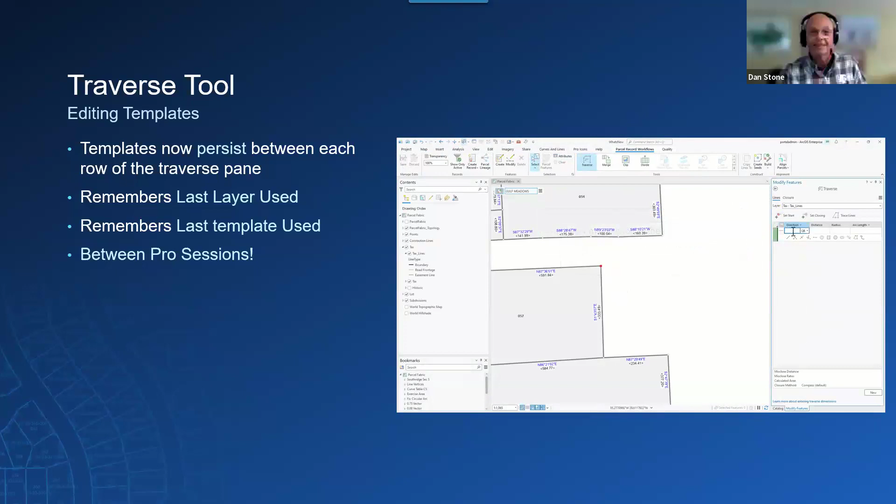The other thing was being able to reverse directions. Jason, you showed this in one of your demos, where we type in and notice, oops, this was the wrong one. Let me come back here, say reverse direction, and then it'll redraw it and adjust the additional lines after that adjustment. So that's another request that came in.

One more tip for entering in traverses: not only does putting the star key in the distance field force closure, but doing the star key in the direction field propagates tangency. For example, if I have a traverse with 5 lines that all have the same direction, I can hit the star key on the direction field and hit enter to go to my distance field, and that line will now be tangent to the line prior. So if I had 5 lines, they'd all show the bearing with a little star at the end, meaning they're all propagating tangency.

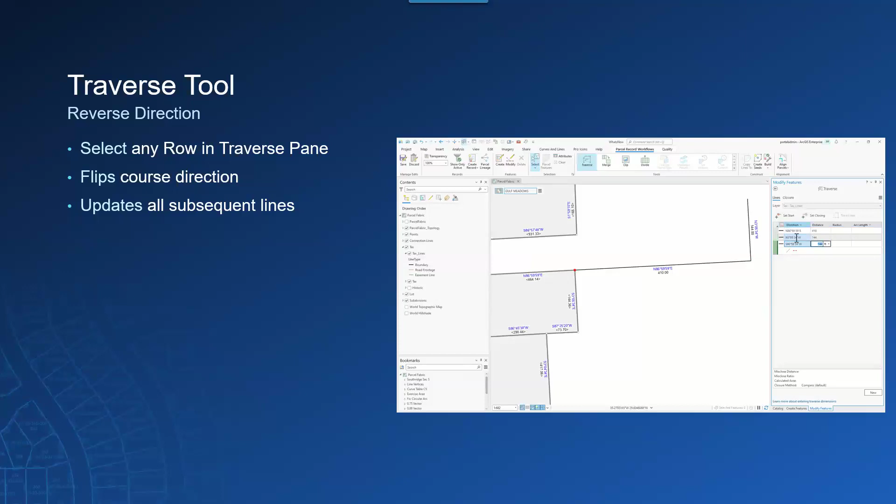If halfway through, one of them changes direction by 3 degrees or maybe 3 seconds, and that's the same for the rest, changing the one in the middle to that 3-second change will propagate down the stars as well. It's just a quick way to propagate tangency through the lines, which is a time saver—you're not having to go back and redraw everything. I think that feature was in 3.1.

Highlight gaps and overlap tool—this has become very popular. Once that tool was out there, people started asking, hey, this works great, but can we use it among different layers in the fabric? So at 3.2, we now have the ability to highlight gaps and overlaps within the same parcel type, but also the ability to use this with visible layers. So if you want to check between your lots and parcels, or between subdivision lots and parcels, just make sure those are the layers you have visible.

People were also asking about the ability to specify only gaps or only overlaps. You can see up here we can specify that now by clicking these checkboxes on and off, so you can choose to use gaps only or overlaps only. This tool will continue to evolve as we get feedback, and it's a very popular tool that people are really liking using.

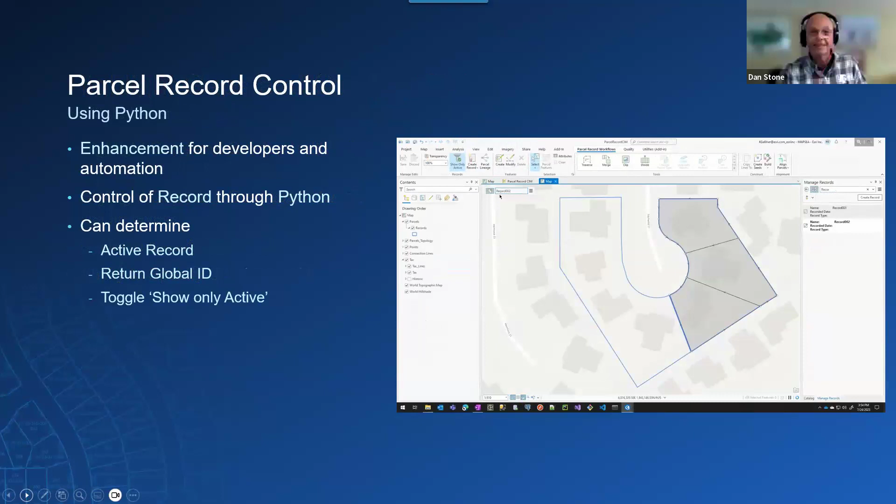Parcel record control - I think we can probably attribute this one to Dean. Being able to get to the record information from Python within the document framework, so you can go out there and see what record is active, get the global ID of that particular record, or toggle the show-only-active setting on a particular record.

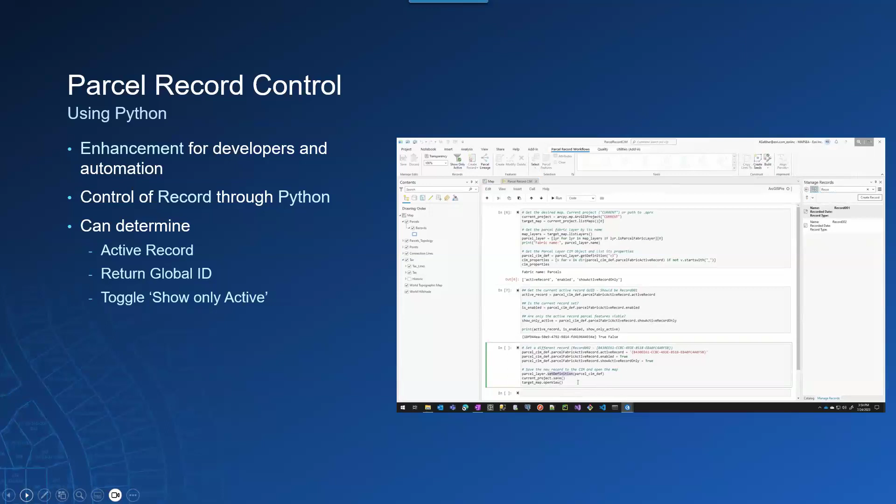Dean, I think this was you that had asked for a lot of this access. I like it, thank you very much, it's very nice. So you can see that your ideas do get implemented.

So wanted to throw up the roadmap and talk a little bit about what we have on it. Parcel Fabric online deployment is something I'm hoping to see in 2024. I don't know if we'll see it in the June release or if it'll be in the fall release, but I'm hoping to see the Parcel Fabric available as an online deployment.

That will be just like you would do with any other geodatabase. You can take a zip file and copy it over to ArcGIS Online, it's going to unzip it and publish it, and then you'll have access to it. If you're using ArcGIS Pro, it will rehydrate your topology and everything else so you guys can go in there and do your edits and store that information against ArcGIS Online.

It's not for everybody - that doesn't have versioning, and there are a couple other things ArcGIS Online doesn't support yet. But for a few counties out there that don't have the ability to stand up an enterprise, it will make sense for them to start implementing.

Additional enhancements are coming into the Traverse tool. People have been asking for the ability to have row numbering on the lines within the Traverse tool, and also being able to resize the font.

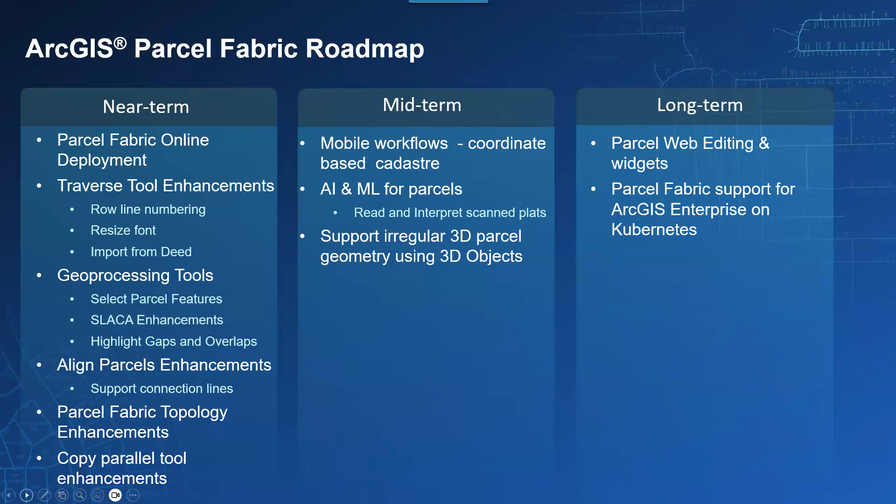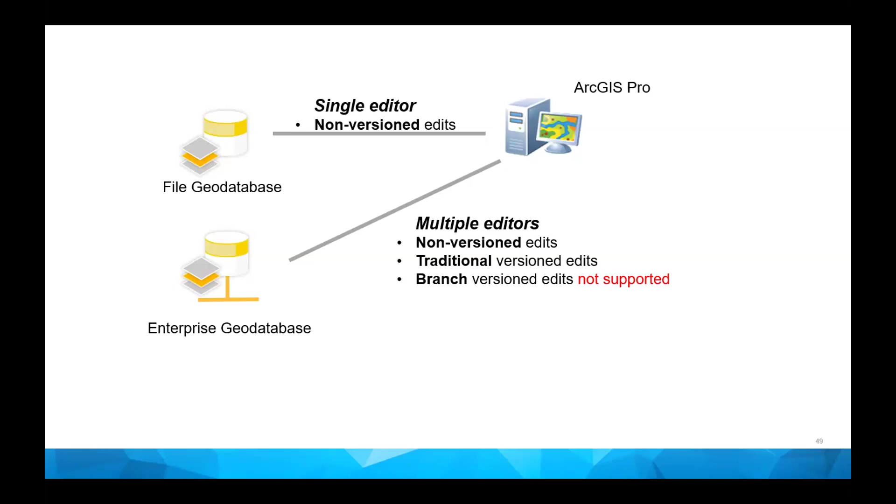So you were essentially, when you started the editing session, maintaining a pipe between the client software, ArcMap or Pro, and the enterprise geodatabase, which is SQL Server most of the time. So that connection stays up and alive the whole time. And there's a problem with that, in that it's not an architecture that performs well when we start talking about web applications or mobile applications on your phone.

Those fundamentally are web services. Web services are typically non-persistent connections. In other words, if you're on a web browser reaching any web page, you're making a request from your browser to the server, which gathers the response page, and then that server forgets about that request. It just moves on to whatever the next request is. So there's no continuity of the connections typically for web services.

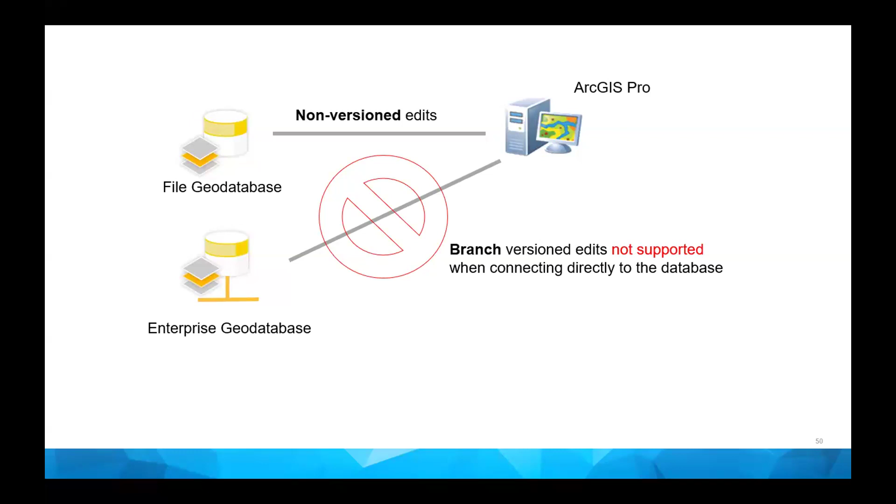Every time you reach out to a server, even if you just previously made another page request, the server doesn't remember. Now, oftentimes when you connect to a web service, some information about your request is being encapsulated in the response that's sent to you, so the next time you connect, it may have some idea of what your previous connection was. These are fundamentally different processing environments.

So how do we get around it? We are now using feature services, web services, to manage the back and forth of the data, and essentially these are non-persistent type connections. This is the way of the world. This is how, since the mid 2000s, we are primarily interacting with our IT infrastructures, through web services.

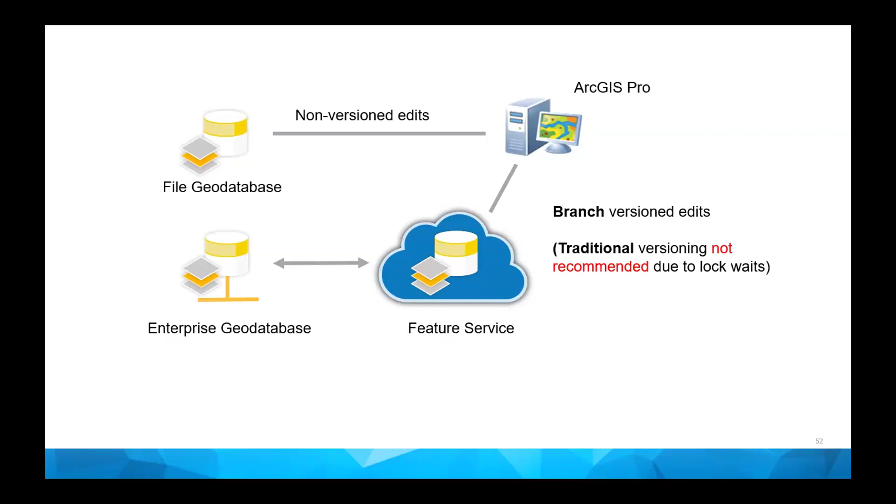So where does this fit here? Since branch versions are all about web services, this is where the portal is. This is what, if you want to think of it as kind of the go-between, the enterprise geodatabases and whatever clients are using.

And you can have any number of these connecting to your services, and they can have all kinds of different clients to it. That's another important aspect of what we're doing: it's not just going to be a heavyweight application like ArcGIS Pro or ArcMap. It's going to be lighter weight options like web pages, web editing, mobile applications, things of that nature that are fundamentally built around web services. So if you were an ArcMap user...

ArcMap came into existence in the mid to late 1990s. There weren't web services at that time. The fundamental architecture of ArcMap was never built with web services in mind. Now, over the years, we added things that allowed you to access web services and display data from them, but at its fundamental level, it never was natively web services enabled.

So for instance, if you're using ArcMap and working with a feature layer stored in ArcGIS Online, which is all web services, and you were editing that, what was actually happening behind the scenes is ArcMap reached out, got a copy of that layer, brought it back, and made a scratch file database with some cryptic file name. And that's what you were editing. Then when you publish those edits back, it would essentially take that version and overwrite the one that was up there. So ArcMap could never really, at a fundamental level, work with web services.

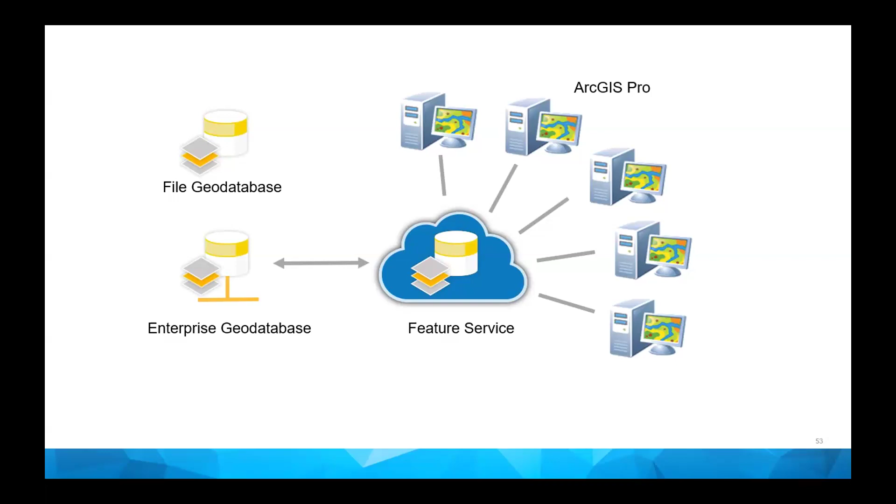Again, more of this whole opening up the door, like Dan's presentation on what's coming down the road. That was part of what we saw. There were the web apps and applications. It'll be environments that other technologies can take advantage of, so you may be able to do edits, attribute edits, in a canvas system that will be able to use the web services to update attributes in the environment. A lot of possibilities there. A lot of business partners are working on those kinds of things that you'll see emerge over the years.

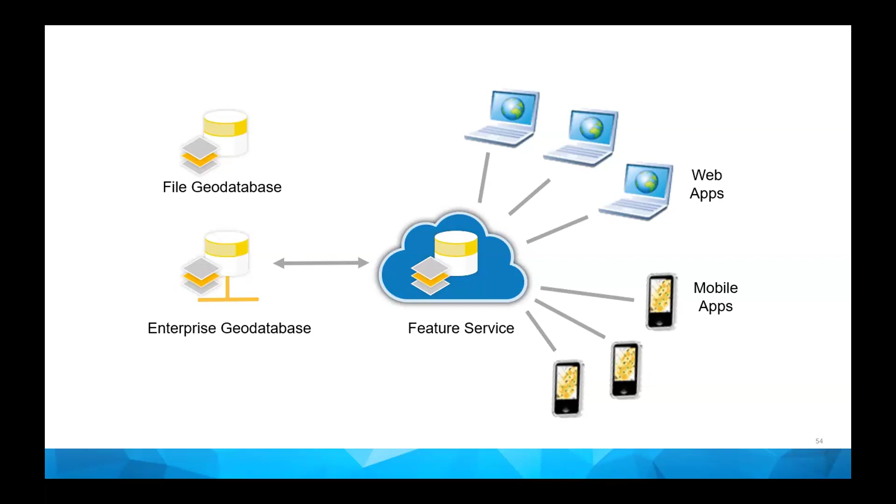How are we doing on time? About 3 minutes. Okay, well, maybe 2, let's get to the key things here.

All right, so when you're working with feature services, and in this case, like with the parcel fabric, behind the scenes there's actually 2 services being stood up. There's a map image layer service, which is a read-only environment, and it's basically the picture that shows up in your map. Behind that, in this case with parcel data, it's streaming the actual geometries through a feature layer service. So when I say a web service for parcel fabric, we're actually talking about 2 services that the software's combining together into your finished application.

When you're doing edits, you're always going to have access to the feature layer. This is cool. We were playing around, and one of the things we found out with that image is that when we're editing our version and doing all sorts of changes, we go, well, how did the map look originally?

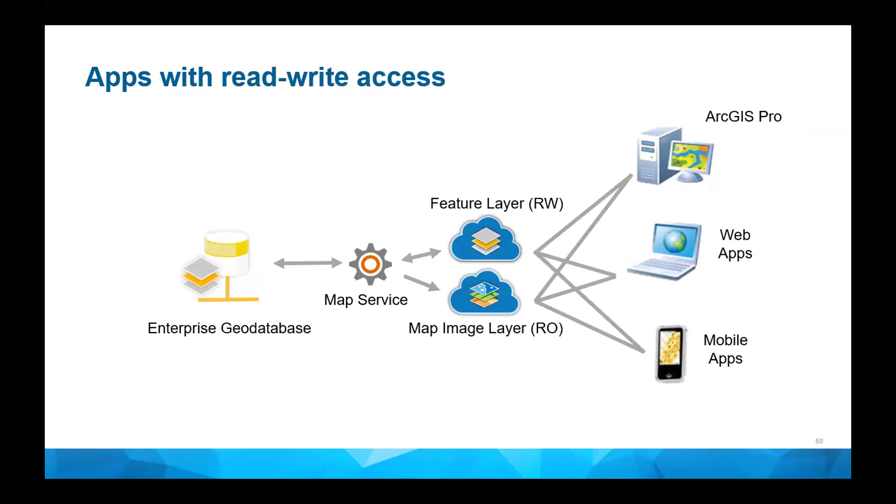Well, I'm only seeing my version, but I can bring up that image, and underneath I can see what my map looked like in the database in a read-only environment. So as I'm making edits, moving lines around, I might have made a mistake. What it looked like before, that other image is there. So some of that application fits really well with different tools you want to look at.

So I'm going to finish up with these last two slides on the differences between them. Branch versioning, the big thing about it is it's scalable. The traditional versioning with those persistent connections - there was no way we could deploy those in an efficient, high performance environment under the persistent connection model. So you can see some of the other advantages.

Authentication - you're really authenticating with a portal rather than the geodatabase. The geodatabase is still there, but the portal is making that persistent connection behind your firewall. So it's still there, but from a permissions access standpoint, who gets to edit, who can see data, it's being managed from the portal rather than from the geodatabase.

We can also take advantage of some of the newer technologies like attribute rules. Service can be accessed through a firewall. A persistent direct database connection will make your IT folks cringe if you try to push that through your agency's firewall - it's an insecure environment. With branch versioning, we're just pushing web services through the system, which is pretty much how everything is working these days.